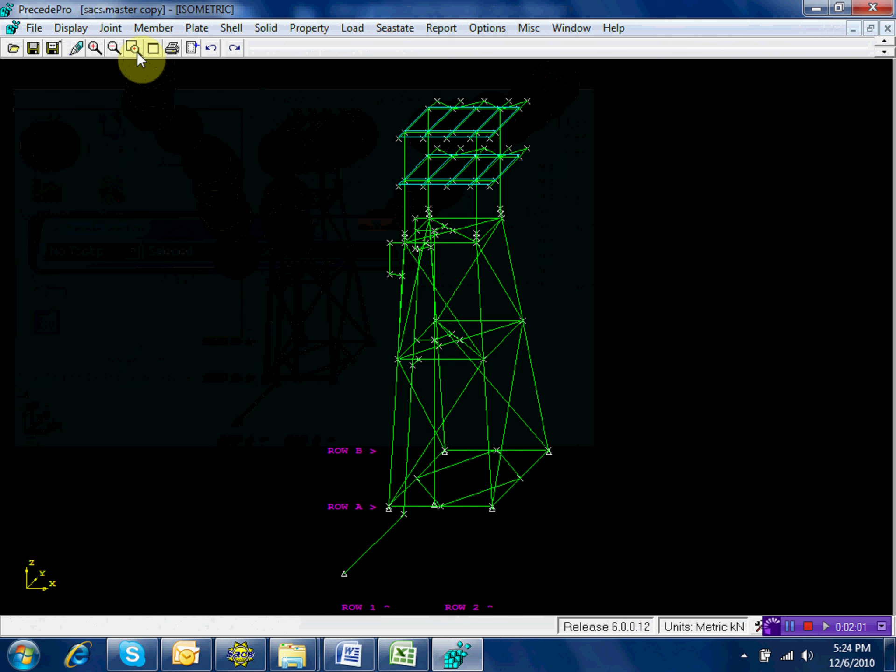So we will apply now corrosion allowance. Usually the corrosion allowance in here, top and then at a certain point. So in our basis of design, it states +2, -3. So if you will check this one, this is 2 and this is 3, so from here up to -3.

One of the methods, since the section changes, we will subtract 6 mm. The best thing to do, for me, because we will define the overrides later on, to be consistent we have to introduce a joint at a certain elevation, and then define this as a certain segment or member.

Like for example, for this, I will add a joint. So I will go to member, and then divide, and then ratio. I will divide the member. I will introduce now the location, the boundary point of corrosion allowance. I will select this member, this leg, and then press apply.

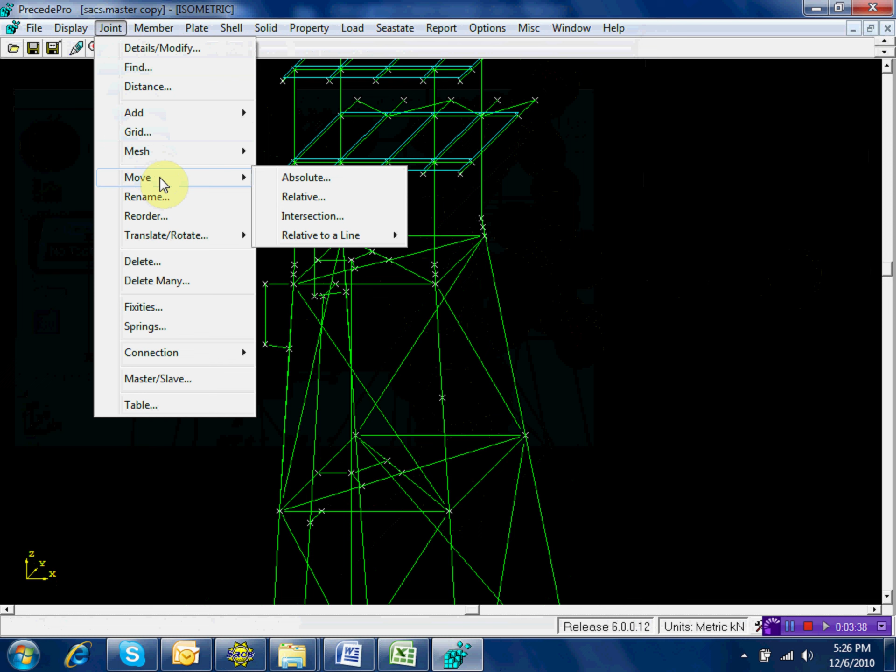So here is now the joint created. Okay, now I will go to joint and move this to elevation. Take note, elevation of the point is -3, right? The splash zone, the lower.

So I will go to move, and then relative to line, and then in terms of z coordinate. I will select Z coordinate. I will select this joint, along that line of course, and then I will consider -3. Press apply. So this is now the point on the splash zone, right?

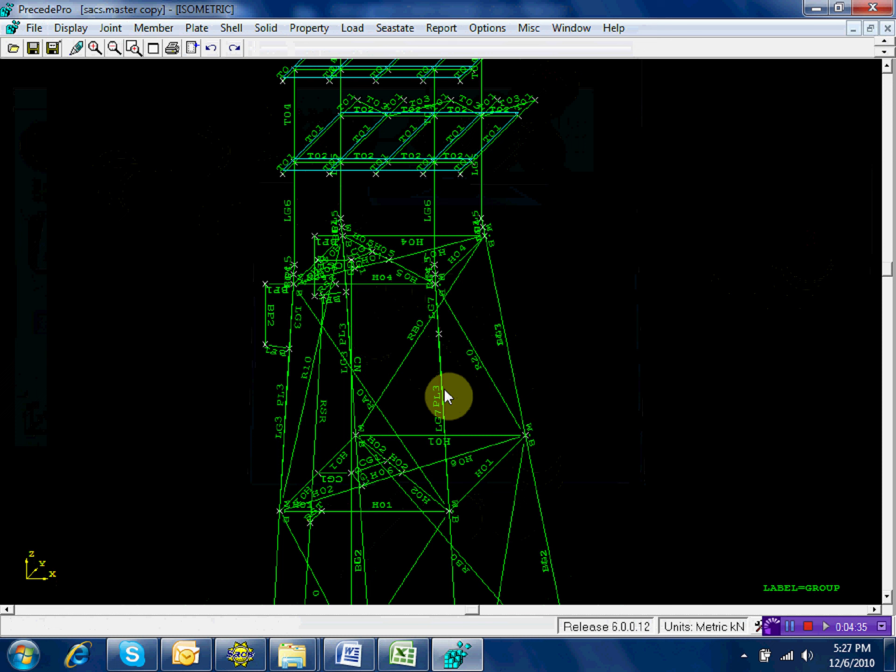-3 and then +3, transition pieces. But you notice, when you add a joint, it will become like this. If I will go to display, go to labeling, and then member group, it becomes leg and leg.

The very principle: you add a joint at elevation -3.0. I will go to display, and then select. I will deselect disconnected joints and plates, and then I will exclude pile, because I cannot clearly see the member. So pile, and then wishbone element, the w.b. Okay, so it will go like this.

Now you notice when you add a joint, the original group member is LG7, right? The original for this member is LG7, LG7. When you add a joint, this becomes LG7 and LG7. Right? So it's automatically assigned the same, but it's not correct. See, in our model, like this, you notice in here, this is the correct one, right?

1.5 meter, you have 105 by 3.5, and 103 by 2.5, and then 1.5. So it should be represented by this. Okay, so I will rename...

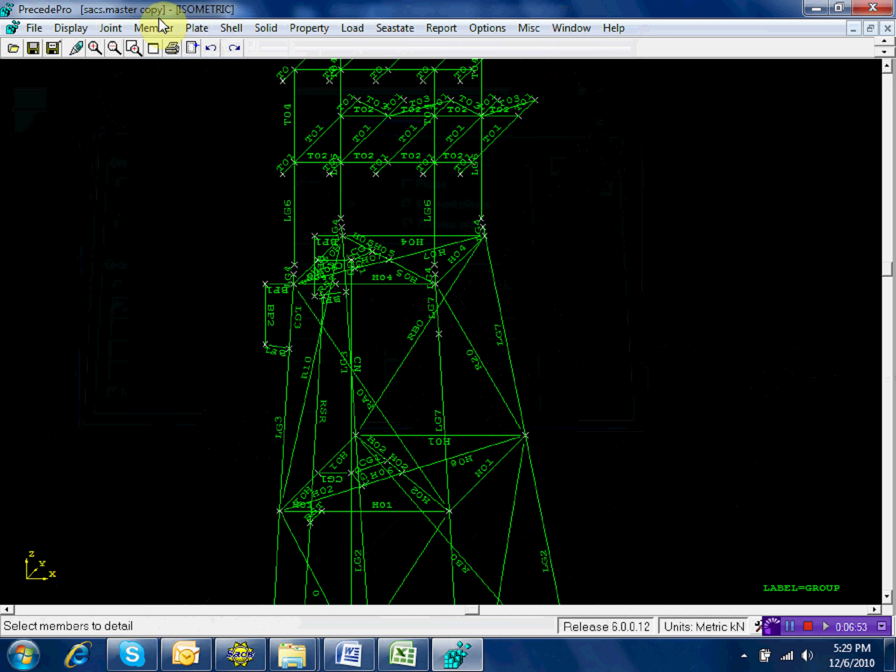Okay, so I will rename this, I will make another group. So member, go to member details modify, select this, and then I will call this LG, you can put A, LGA for this. LGA for this. Okay, LGA, press apply, and this I will change to this member on the upper half on the splash zone area as LGB. LGA, LGB. Press apply. And then I will define LGA.

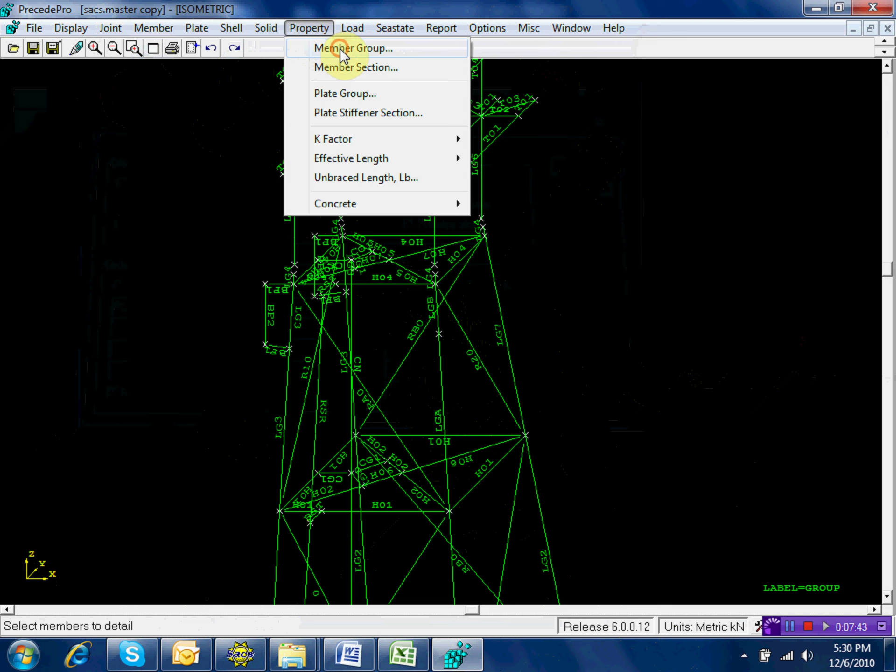Now take note, LGA to member segment. So go to property, member group. I will define now LGA, which is this. LGA defined. This is a tubular member. What is the diameter? 105.

We can copy, probably. No, but this is 3. It's okay, for a while.

105. I will discuss how to copy group level later on because this is symmetrical. Let me finish first. 3.5, okay, and the FY for this is 35, right? Segment length, you have to define 1 segment length if you have 2 segments, and the rest will be by program. So in this case, the length is how much?

1.5. Legs should be flooded. There are 2 segments, like 1.5 meter length, and then the rest will be calculated by the program. So I will add segment.

Diameter for this is 103, and wall thickness is 2.5 with FY of 34.5. Always check flooded member for the leg. Now do not put any length because you have already defined 1 length. Automatic, the program will determine.

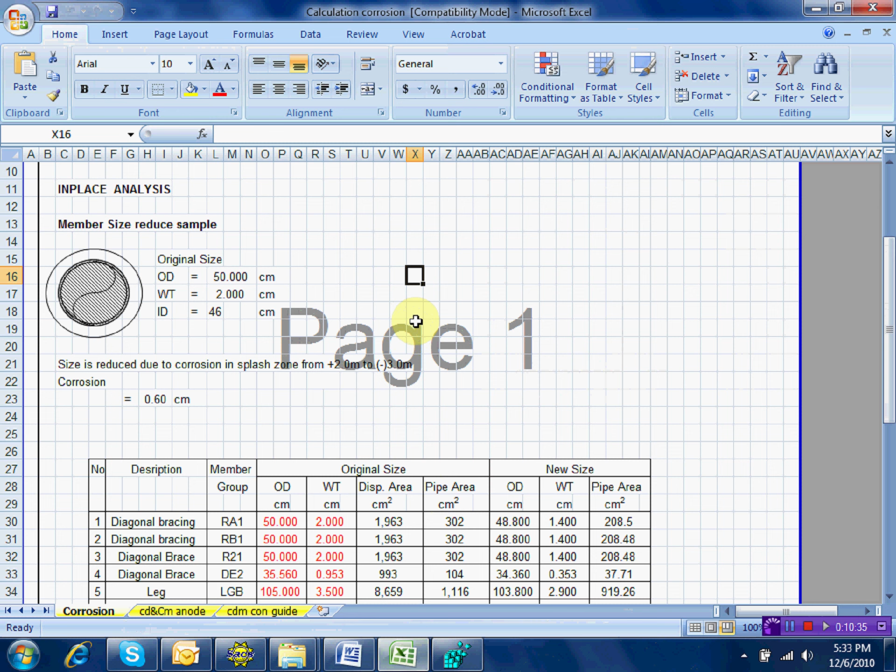Okay, that's why I sent to you the Excel file. You can go here. So you see, I have already this one, the leg, LGB, this file here. You have two segments having different diameter and wall thickness.

Now, the corrosion allowance as per design basis is 6 mm, right? So this is already calculated. All you have to do is input the wall thickness and diameter, and this is automatic already. We have already the formula. Now try to check the formula. I have already provided the formula.

Okay, so this will be your new size. Now, for example, see, LGB diameter is 105 by 3.5, right? See, 105 by 3.5. And the remaining one is 103 by 2.5.

So this is now the new pipe area, the new pipe diameter. We need this to input in our structural dimension. So this one is already less with 6 mm corrosion allowance. Because see, if this is your member and there is a corrosion allowance, you have to subtract.

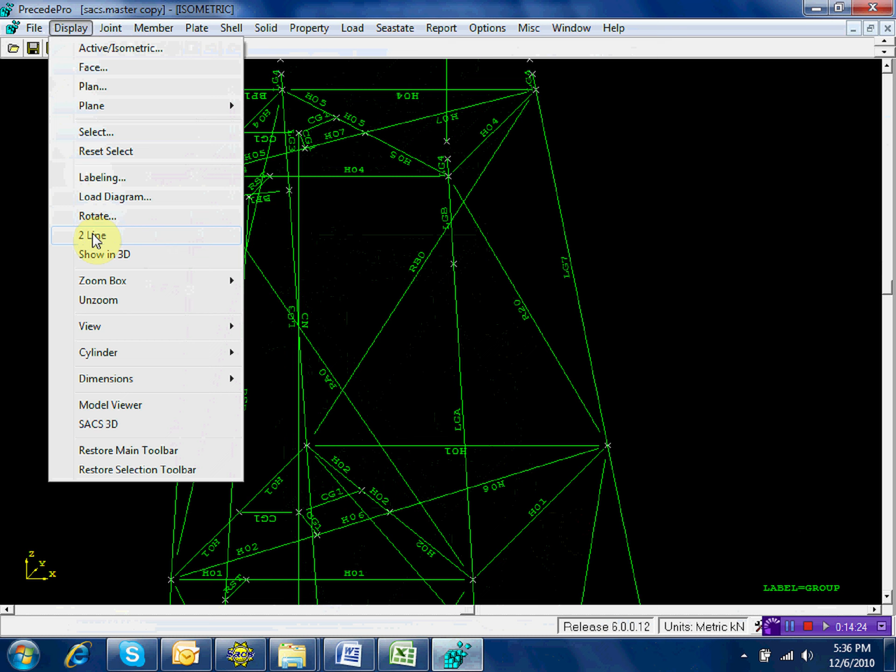You have to check flooded member, right? So LGB is already defined. But you have to check visually, because sometimes it will be reversed. Go to display, double check, and go to 2 line. Is this correct? Yes, see?

We have 1.5, and this one, the segment length here is subtracted with corrosion allowance. This is minus 3 up to 3.

Okay, the same procedure also on the other legs. This is minus 3. This is minus 3, huh? Okay, that's the splash zone. Minus 3 is the splash zone at elevation minus 3. Okay, on the side also, on this side, right?

On this side, now take note, this is similar, nah? So LGA for this, you have to double check. Okay, so 1.5 length, and then you have subtracted already the section up to here and up to here, up to 3 meters.

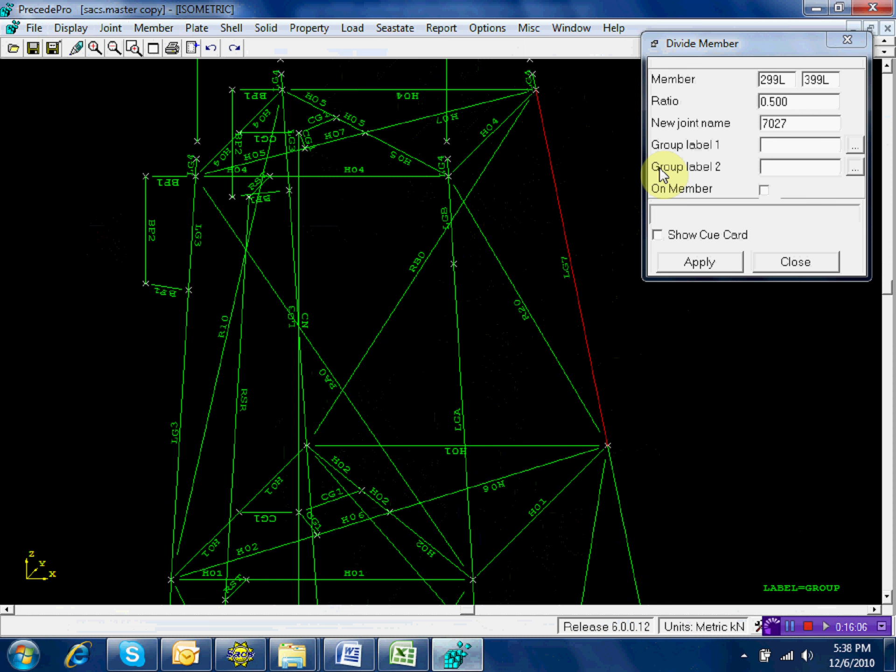Okay, on this leg member, divide, ratio, select this, nah? Apply, and then go to joint, move relative to a line in terms of z coordinates. Select this joint to be moved, this along a line, this line, and this line. The z coordinate should be minus 3.0, because the elevation at the splash zone lower limit is minus 3.

Apply, okay. Now you notice LG7 is a 3 segment. This is 3 segment length. See?

One segment length here and the other on this side. Huh, this is wrong. So what will I do? I will change the group. No, I will modify. This one is LGA, LGB. I will call this as LGC.

ABC, okay? Now, this member segment is actually equal to this. Yes, same, right? So instead of doing this, I will copy. This is the same, right? C and A are the same.

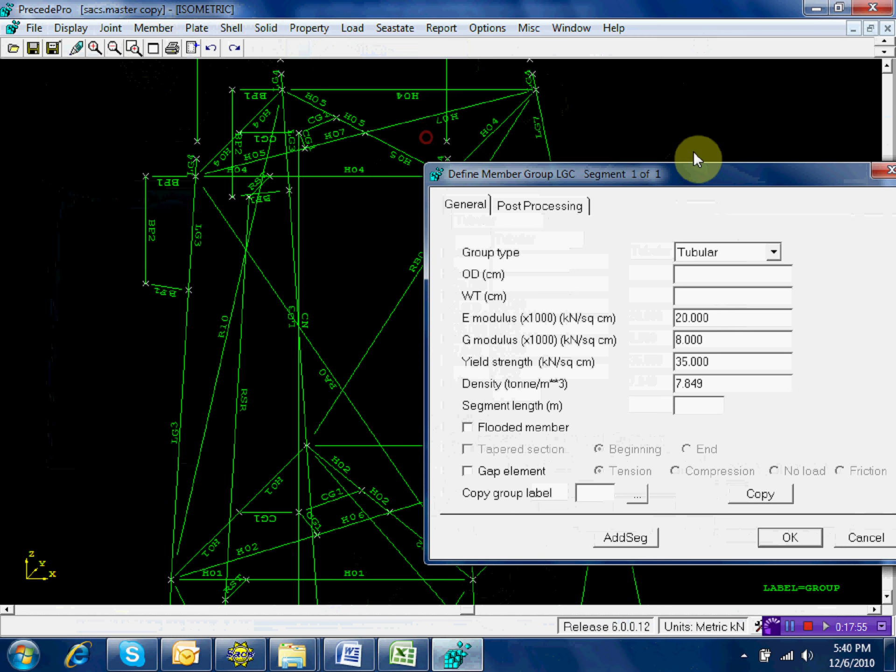So instead of doing that, I will go to property, member group. I will define LGC, okay? Define LGC, because this is LGC. Define, and you see in the group, copy group label. You can do that, nah? I will copy what member? LGA, right? LGA. So I will go here.

And then I will select LGA. See, I select LGA. When you press OK automatic, you have to press copy. Copy, see, it becomes like that. Automatic, it's copied. The length is 1.5 automatic. What is the characteristic in LGA is also copied in LGC. So instead of inputting manually, you can do it manually, but you can copy also.

This is the first segment, right? 1 of 2, so I need to skip segment. I will press this, press skip segment. And then 103, 2.5. So this is now the segment 2 of 2. This is correct, right? 103 by 2.5. This is for segment 2. Okay, so press OK now. Is this okay? Okay. Close and then save.

LGB, LGA, LGC. So I will modify this member. The member on the splash zone area, I will call this as LGD. This, the remaining, and you notice LGB and LGD are the same. Segment, diameter, length. Just copy. Okay, apply. So this becomes now LGD.

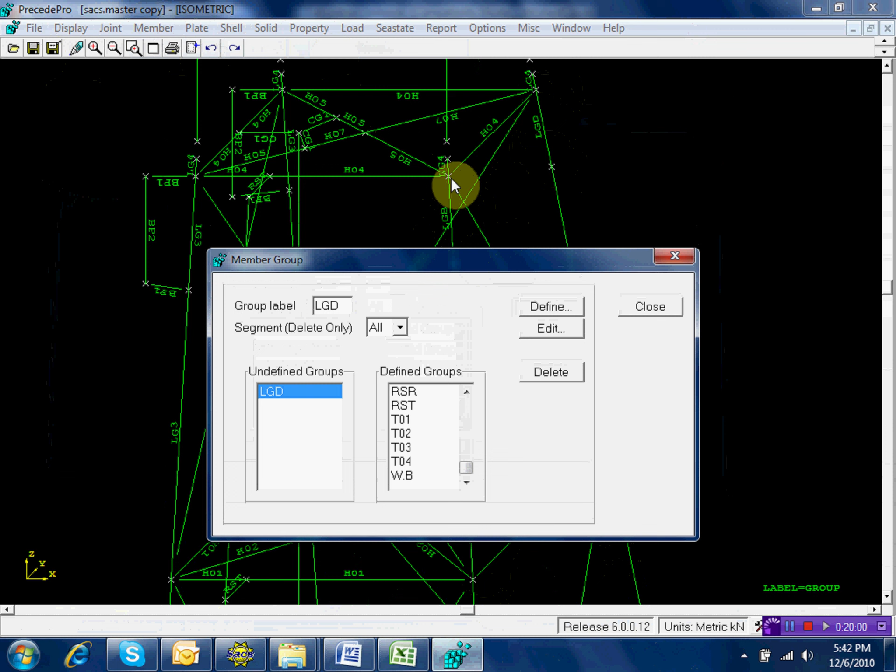So I will go to property. I will define now LGD. Member, select LGD. Name this as LGD and copy LGB. Copy this because they are the same. Okay, define LGD now. Define.

And then I will copy group. What label is this? LGB, just copy. LGB, press OK. And then you have to press this one. Press copy, so it's already copied. Skip segment length, okay, so already defined. Copy, just only press copy.

And then press OK. Now double check. Display 2 line. Is this correct? Yeah, see, this is 1.5. And this length is already corroded.

So, minus, smaller, smaller. So based on this calculation, we have the calculation. You subtract the diameter and thickness by corrosion allowance of 6mm. So it becomes like this. The new size is, you have 103 minus 6mm, on 3 on both sides. So we have the formula.

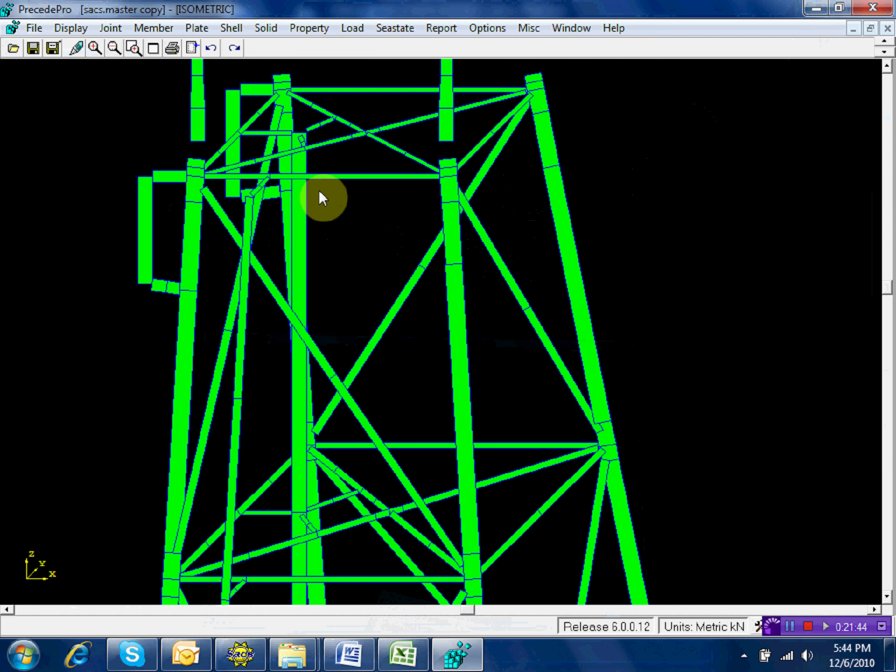Okay, at the same time, on these legs also, you have to consider corrosion allowance. Okay, so I will go to member. I will divide this member. Member, divide, ratio, and then select this member, this LG3.

Apply, okay? And then I move this to -3. Joint, move, relative to a line. Z coordinate. Select this, select this, this one, this one. And then -3.0, press apply. So this is now -3.

Now you notice this member, what is the diameter of this member? This is below, this is below. LG3, it's okay, but how about this? This member. So -3, actually this member is this. That's 1.5. This member below the splash zone, this 103 by 2.5, right? So that member is 103 by 2.5.

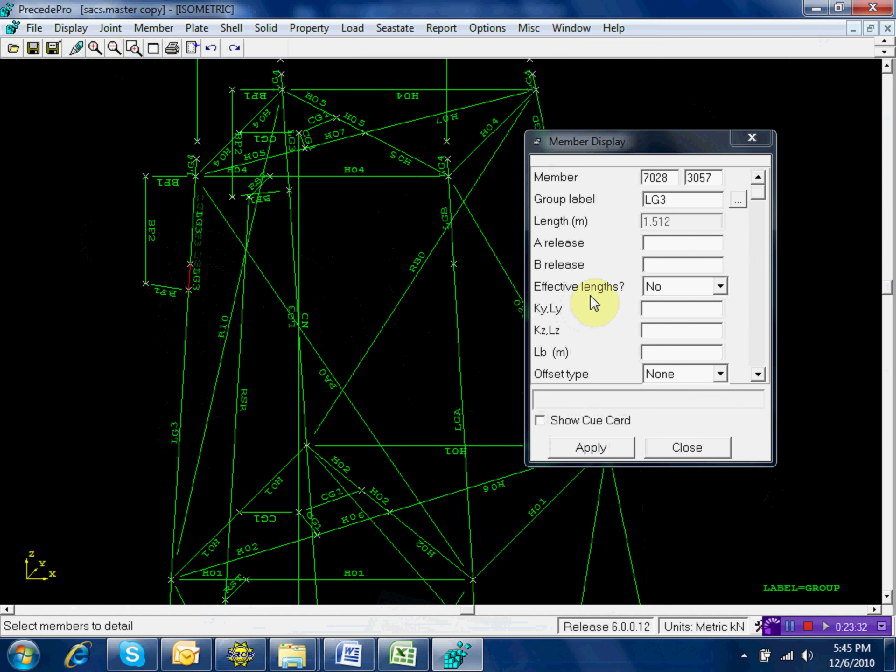So you are going to define. I will name this as... go to member, modify. You have to change this one, because LG3 is a 2 segment length. I will name this as LGE. You can name LGF as long as LG, it's automatic leg. LGE.

Press apply. I will define LGE. Property. Go to property. Member group. Define LGE. LGE is 103 by 2.5. The yield stress is 34.5. Check, always flooded member, for leg flooded member. Okay, so this okay now. Press OK. Close it. We have already defined.

Okay, this one, since this is no longer the same, this is no longer the same, I will rename this as... this member as LGF. LGF. LGF for this. Press apply.

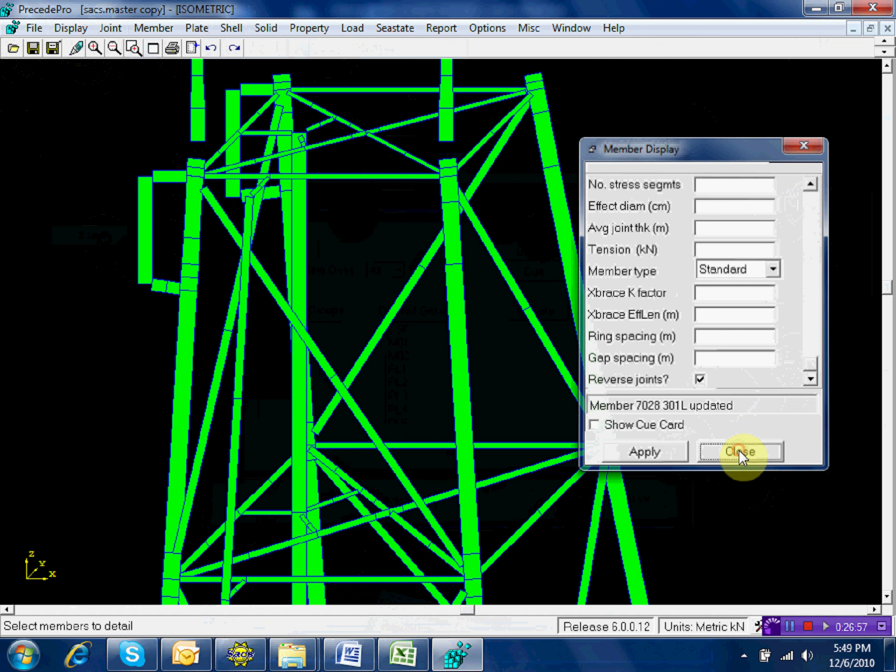Go to member, go to details. Select this member, and then reverse the joint. Reverse joints, press apply. Do not reverse if your model is correct. Then redraw screen. Press redraw screen. See, I have already here the can.

On the other side, on this also. LGF, LGE. LGE, LGF, copy, LGB or LGD.

This is very important to check the structural integrity. As per design basis, you should subtract. Other designers, instead of subtracting, they add 6 mm, so it's already incorporated in the section. In this case, we will subtract.

I will go to this leg, the other side. Go to member, same way, divide, and then ratio. I will select this leg, this leg, this leg. Apply.

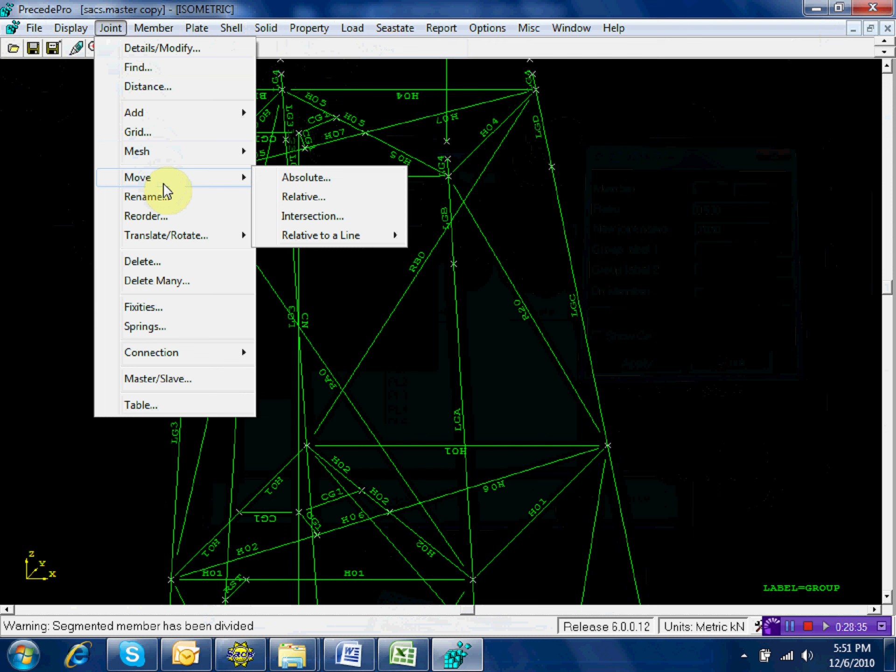Then I will move this leg, this joint, at 3 meters. At minus 3, I mean. Go to joint, move relative to a line in terms of z coordinates. Select this, select this, select this, and you want it to move at -3.0. Press apply.

I will change the group, but I will copy. So member, modify, select this, select the smaller one. I will change this to LGH. You can do LGI, LGI. So, I. LGI, LGI. Apply. And the top, this done as LG.

What do you think, do you have already defined H? LGH. LGH. Apply. They are the same, this one and this one are the same.

So I will go to property, I will define LGI first. LGI and LGE are the same, right? This one, so I will just copy LGE. Copy LGE. Press OK. So I have LGE now, and then you press copy, so this signals the program to copy that member or group.

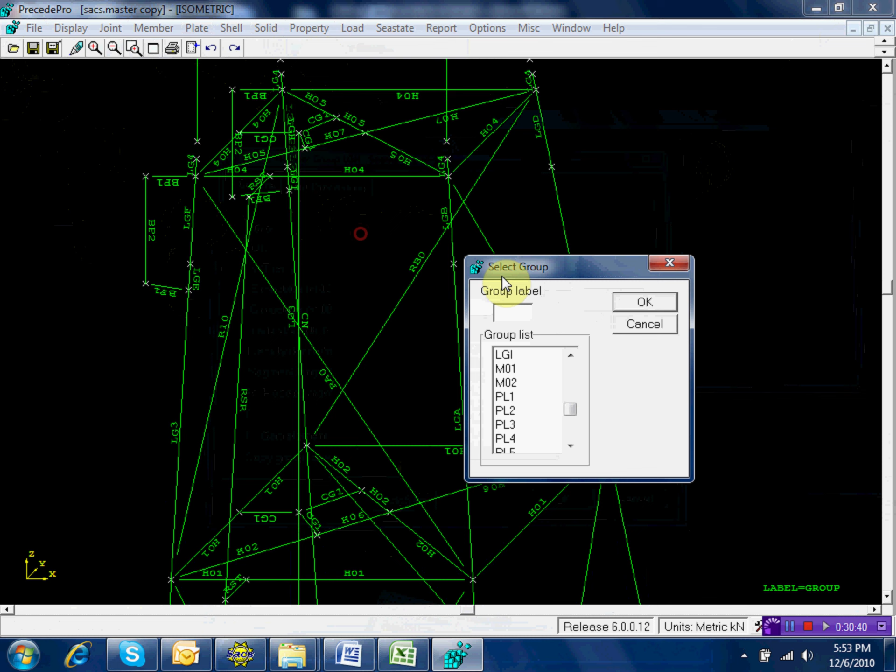Press OK, the same way on LGH, this member here. LGH, define. You have to copy what? LGF or LGB or LGD, LGF. I will copy LGF. LGF. Okay, and then press copy. So it will be like this.

Take note, LGF is two segments. Just press skip. Okay, so I have already now defined this one. Same procedure, flooded, the length is 1.5 automatic. So this is the fastest way, right? Copy a segment. If you want to, you have to go to property, member group, define, and then copy.

LG4 is also corroded, right? Because as per design basis, it's plus 1, minus 3, and plus 3. I changed this to plus 3 in order to, for this one, transition pieces, because usually transition pieces are corroded. It's corroded. Okay, so this one up to here, up to 3.

So if you go to joint, see this is at 3, minus 3. So this one, right? So LG4 also will be corroded. LG4 is actually 105 by 3.5. Take note of this. LGD, LGB, LGF, and LGH are corroded already. You subtract the diameter and thickness. So define also LG4.

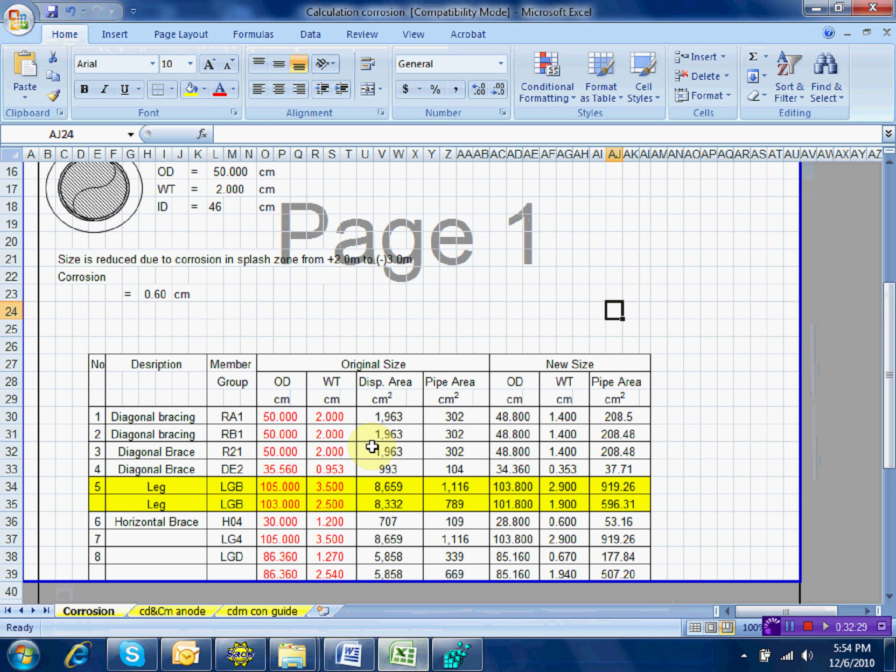LG4, okay, so this is LG4 now, this one. LG4 is 105 by 3.5. You subtract this with a corrosion allowance of 6 mm. It becomes 103.8 by 2.9. Go to property, member group, and select LG4. Press edit, you have to edit because it's already defined.

You just have to change. So you put 103 by 2.9. 103.8 by 2.9. 103.8 by 2.9. 103.8, LG4, LG4, 103.8 by 2.9. Press OK.

What else? We have already applied corrosion allowance on the leg. You need also to apply it to jacket legs, piles above jacket, transition, deck legs, diagonal braces, and nodes pertaining to the vertical face of the jacket seats. Take it in here.

Diagonal braces. Okay, before you add a joint on this diagonal, turn off the offset first, because this is already offsetted, right? This member, see, this is being offsetted already, automatically. So turn this off before you add a joint, otherwise you have two offsets. You get a problem with that.

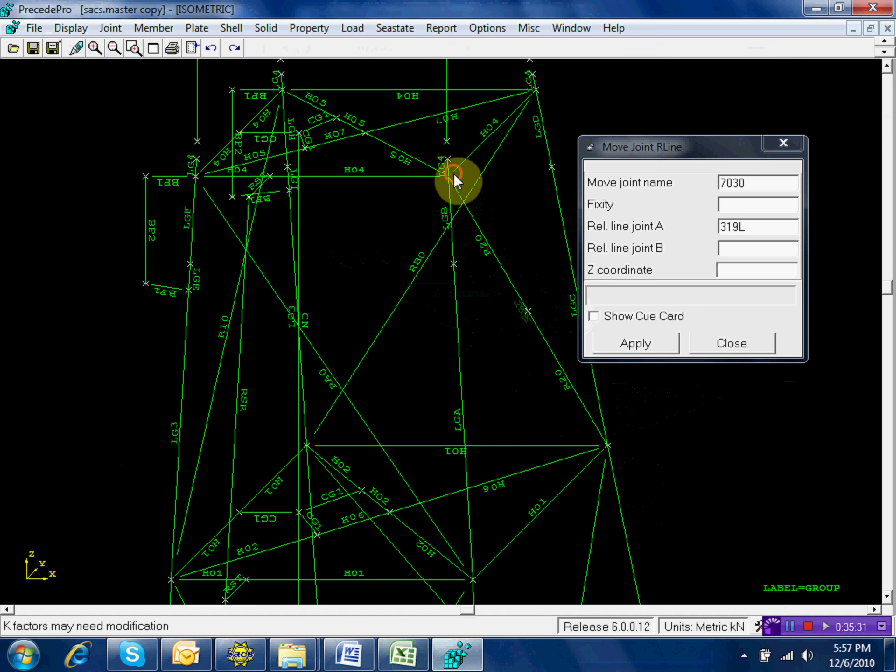But take note, the splash zone is located at minus 3. So joint, go to joint, you move this joint, move relative to a line in terms of z coordinate. Select this, move along the line, this one and this one. Your coordinate now is minus 3.0.

Okay? So this is the proper way to model corrosion allowance. So it should be on -3, the corroded part. Save the model first. Okay. This one, below the splash zone, has no corrosion allowance. So this is okay, right? R20 is okay. But this one, the remaining one, is not okay.

This is corroded. So I will change the member group. Member, details. This one, I will select this one. And then I will make this as R21. This one is R20, this one is R21. Okay? R21, press apply.

R20 is actually, what is the diameter of this? Display, labeling, I want to see the section. This is 50 by 2, R20 is 50 by 2. So this one should be R20 minus the corrosion allowance. R21, the original section is 50 by 2. So go to display again. Labeling, member, and then group. I will define R21. Okay?

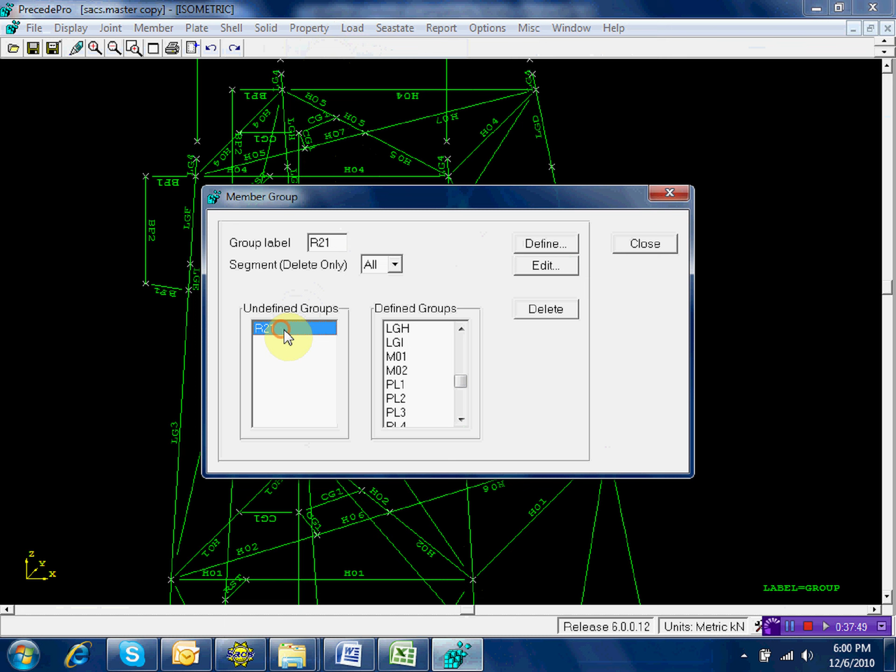R21, so go to property, member group, define R21. This is 48.8 by 1.4. So this is 34.5, 7 point. Legs only are flooded, so do not check flooded member.

Okay. So, double check. Display. It will be like this, it's already subtracted, so this one is the larger one and this one becomes the smaller one. Save. On the other side, same way. But first, turn off the offset. Because if you don't turn off the offset, this side will be offset and the other side will be offsetted.

Now, go to member and then offsets. This one. Press none. Apply. And then revise. So I will go to member. I will divide the member. And then put ratio. This one. So this is a very painstaking procedure. You have to correctly model this one.

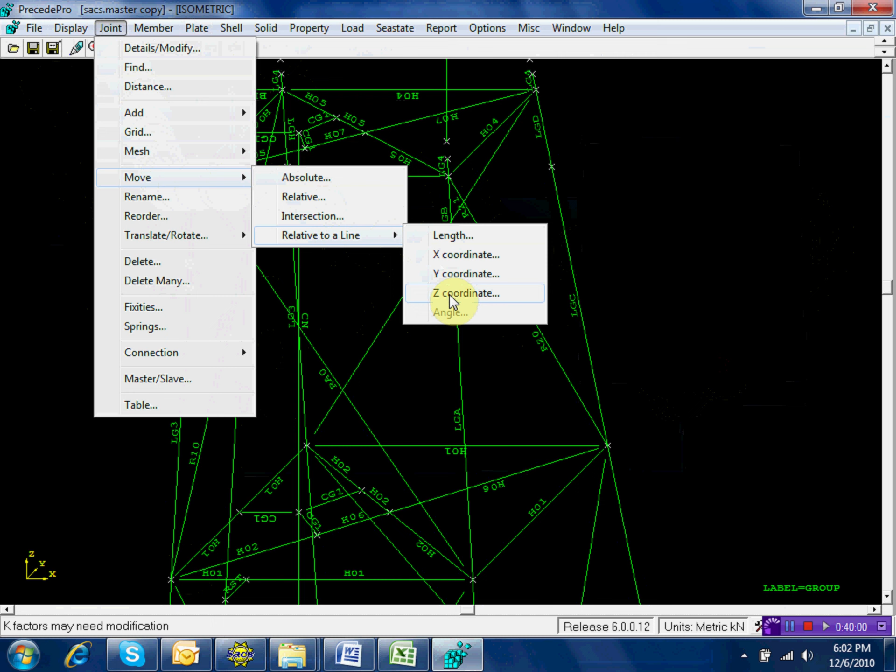Joint, move relative to a line in terms of z coordinates. Select this. Select this. Select this and then minus 3.0. Apply. R10 is okay. Now take note, these are the same, no? Diagonals are the same, so you can copy R21, but you have to change it.

Member, details, change this one to this member here. This is R10. So I will make this R11. This is R20, I make this R21. This is R10, I make this R11. Okay? Apply. And then define. But take note, diameter and wall thickness of R21 is equal to R11. So go to property, member group.

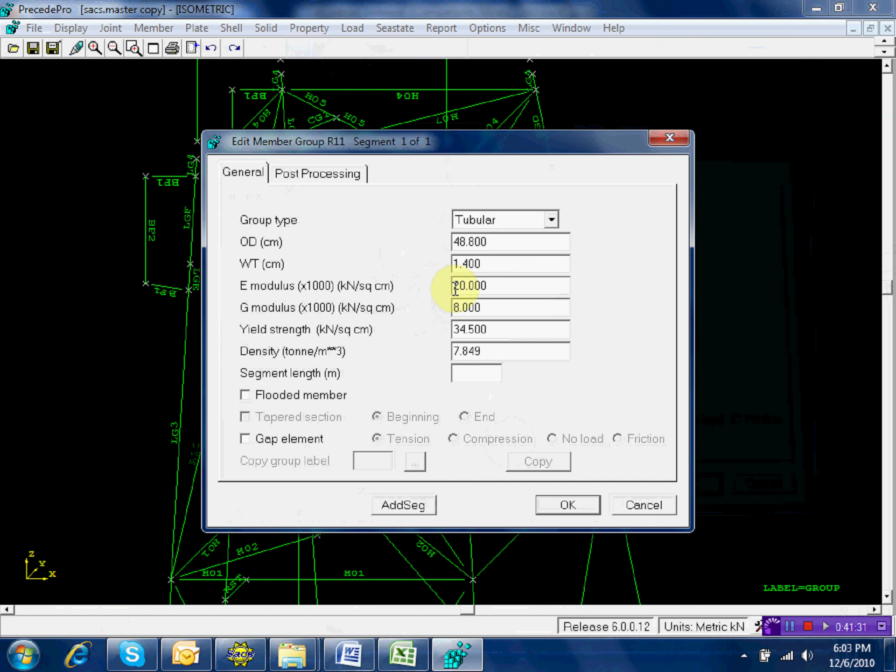R11. Press define. And just simply copy R21, because they are the same. So group, copy group label. R21. Press OK. And then copy. So this is now the corroded, no? It's corroded already. Press OK. So you define only one and then on the other side, on this diagonal.

Don't divide first. You have to turn off the offset. This diagonal now. This diagonal. Offset will be none. Apply. Okay? And then I will divide. Member. Divide. Ratio. Select this. Are you following? Press apply.

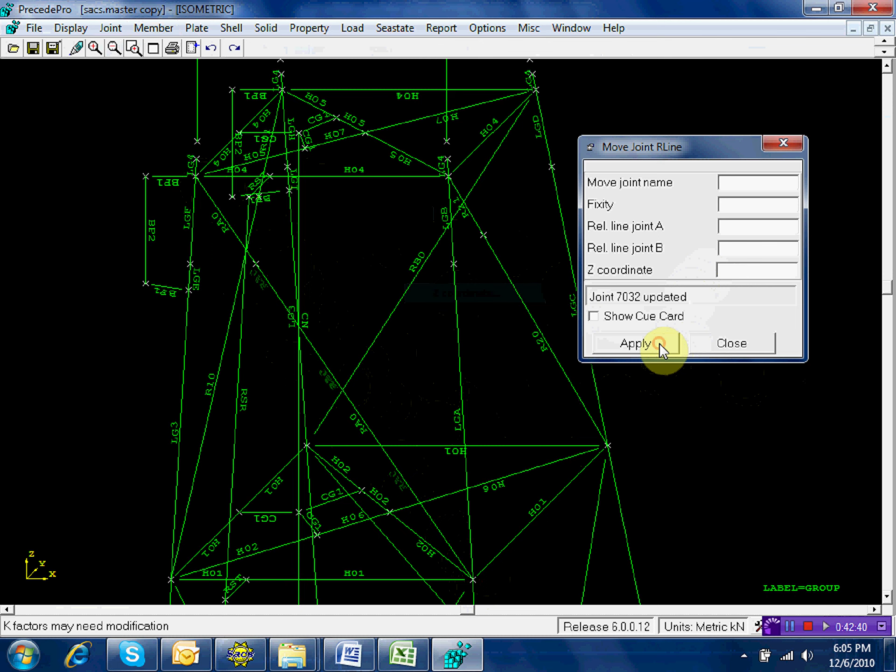And then move this joint at -3. Joint, move relative to a line in terms of z coordinate. This one, this one, this one. So minus 3.0. Press apply. Okay, RA0.

I will change this one to this member. This member only has a corrosion. This one is okay. So I will change this to RA1. Thank you. RA1. So press apply and then copy. It's either R21 or R11 because they are the same, no?

Property, member group, I will define RA1, define, and then I will copy R21. R21 is the same, no? R21, but you have to press copy in order for the program to copy. Now, this is already copied. Press OK.

Close it. So, you have already done this one. The other side, you have already done this one, right? Okay, it's already done. So, we have only this side. So, remember, turn off the offset. None. Press apply and then divide that member.

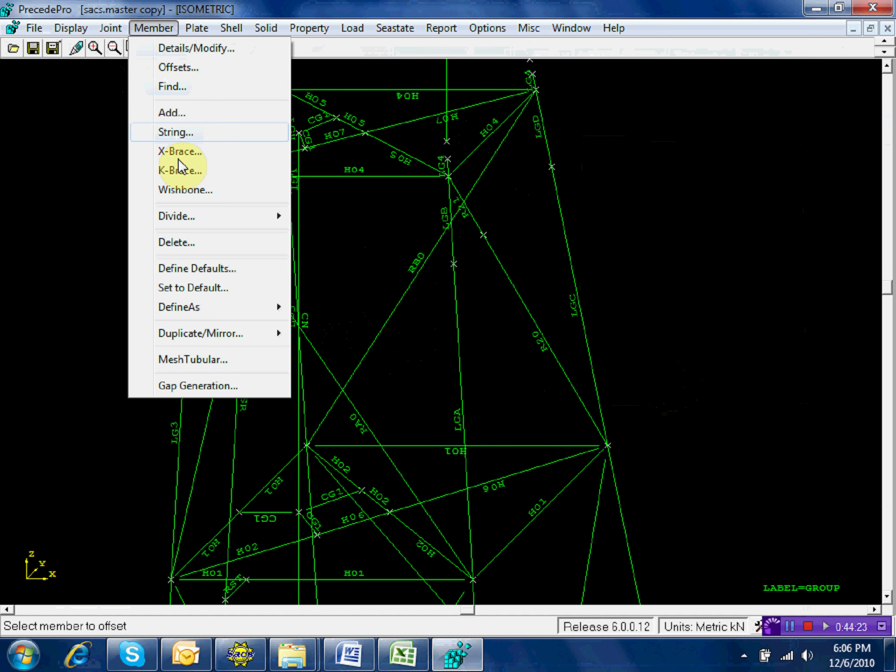Apply, and then move this member at elevation -3. Joint. Move relative to a line in terms of z coordinates. This one, and this one. -3.0. Press apply.

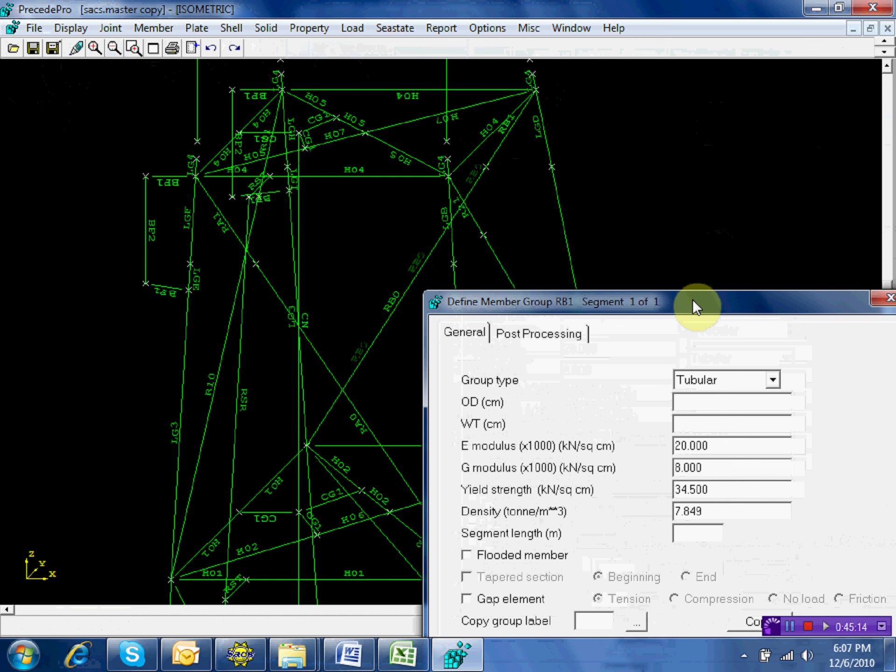RB0 is okay. So we will define the upper section. Member, details. I will change this one to RB1. Apply. And then change this to RB1, define RB1 property, member group, RB1, press define, but take note, RB1 and this one, RA1, are the same. So copy RA1, this one, press OK, and then press copy. It's already copied. Press OK, close.

Okay. When I don't offset the member with none, I think the result will not be different. Not different, are you sure? It's not different. No, do not do like that, okay? One member I copy. Okay.

The member I will offset. Now, if you offset this one, see, you have already offset, and then when you divide it, automatically there will be an offset on that side. Because when I do the drawing then... No, there will be. For example, this one. Say this is with offset, right? This one will be with offset. If I divide this member into ratio, okay.

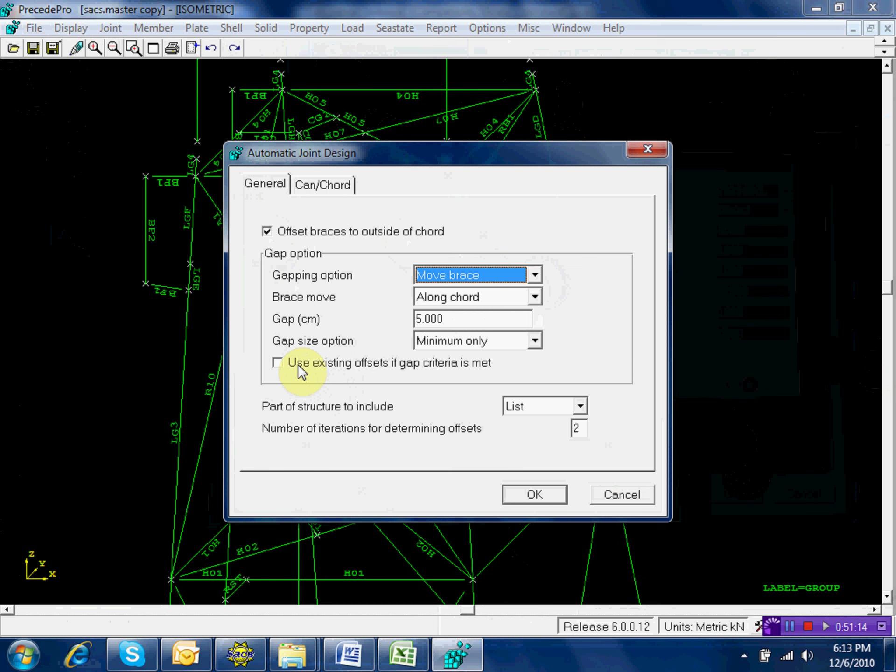So I will go back to offsetting. Go to joint, connection, automatic design, offset brace outside. We will go back because we turned it off. Just go back, no problem. And then go to move brace, and then check use existing offset if gap criteria is met. Okay, so you go back already to the offsetting.

Go to joint, go to connection, press automatic design, because we turned off the offset, right? So we'll go back together. Automatic design. Check offset brace to outside chord, and then move brace, and then check use existing offset if gap criteria is met. Press OK. So it's already offsetted, sir. No problem. You just go back. Okay.

My question now, when will this corrosion take place? Is it during or after the installation? No, I don't think so. This is more conservative. We assume that at the splash zone area, all has been corroded. So maybe it takes time, 5 years up to 20 years or the lifetime of the structure. Let us say 20 years.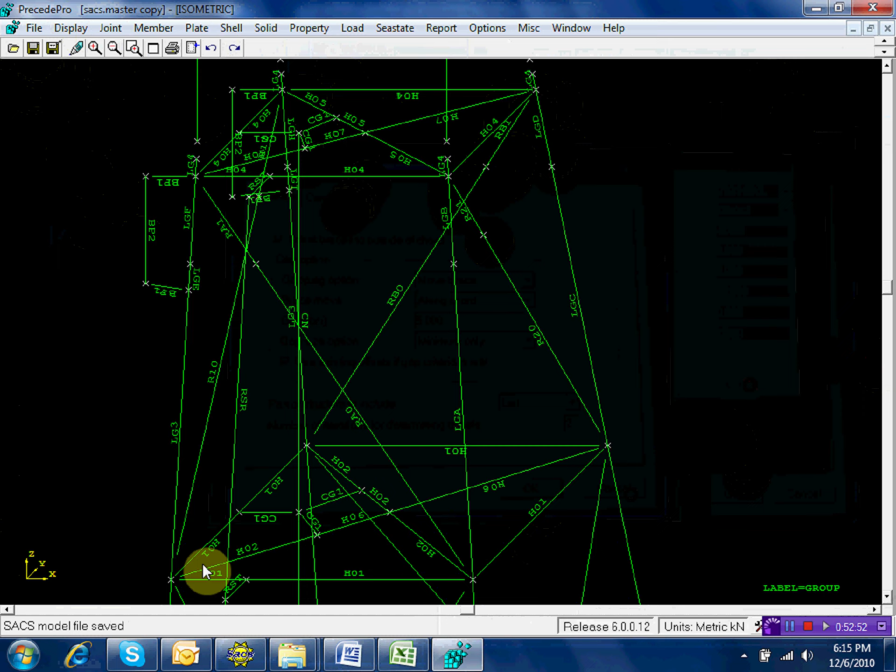But in the real sense, there is wave loading on the original size. So to capture this original size, we need this parameter. That's why it's in here. We use this new size to calculate for structural integrity purposes. How about wave loading?

So you notice that wave loading is a function of diameter. When you reduce the diameter, your wave loading will reduce also, right? So all you have to do is use what we call overrides. These group overrides will be used by SACS to calculate loadings. It will not affect stiffness or structural.

So for loading purposes, for example, displaced area will be used in calculating buoyancy. See? We have the displaced area in calculating buoyancy, pipe area in the original in calculating weight. Okay? So how to use this one? Okay. We change the diameter R21, LGB, LGD, and thickness.

H04 also is included. By the way, because it's not complete yet, we will go to peripheral members and nodes pertaining to the upper horizontal level. It's only on the periphery. So what is the upper horizontal level? This one. H04, H04, H04, H04. So based on our design basis, what is H04?

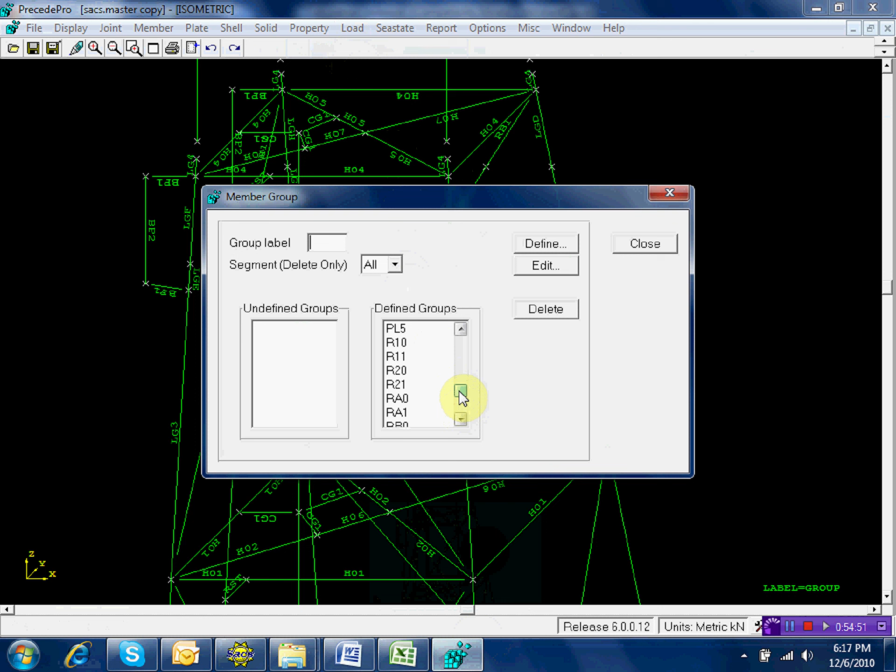We have here. So it becomes smaller. That's a problem. So for H04, it becomes 28.8 and 0.6. So we'll apply H04, right? Go to property, member group. We will update H04. H04, edit. The wall thickness should be 28.8 and 0.6.

Okay. Do not consider the inside. Yeah, we have inside, right? Do not consider inside because as per design basis, it's only on the peripheral members and nodes. So it's already complete, right? But in wave generation, you have to consider the actual dimension. So how to do that?

You go to Seastate. Go to global parameters. See? In the global parameters, we have what we call group overrides. Member overrides, and we have member group overrides. So we will use the member group overrides, because these are groups. That's why I introduced joints to make the analysis simpler. Now, group overrides. I will use member group overrides.

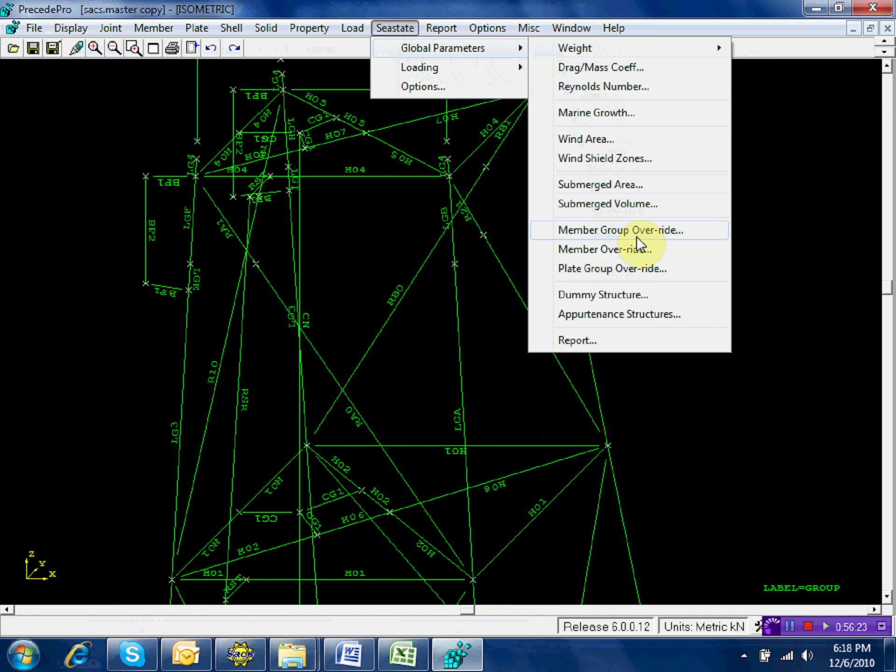Define. So, what are these members? Those members we defined earlier on the splash zone, because we altered the diameter, right? When you change the diameter, your wave loading will change also. Actually, it's only for integrity purposes. So, first is LGB. I will define LGB. The group LGB. Add. So, I have now LGB. Press OK.

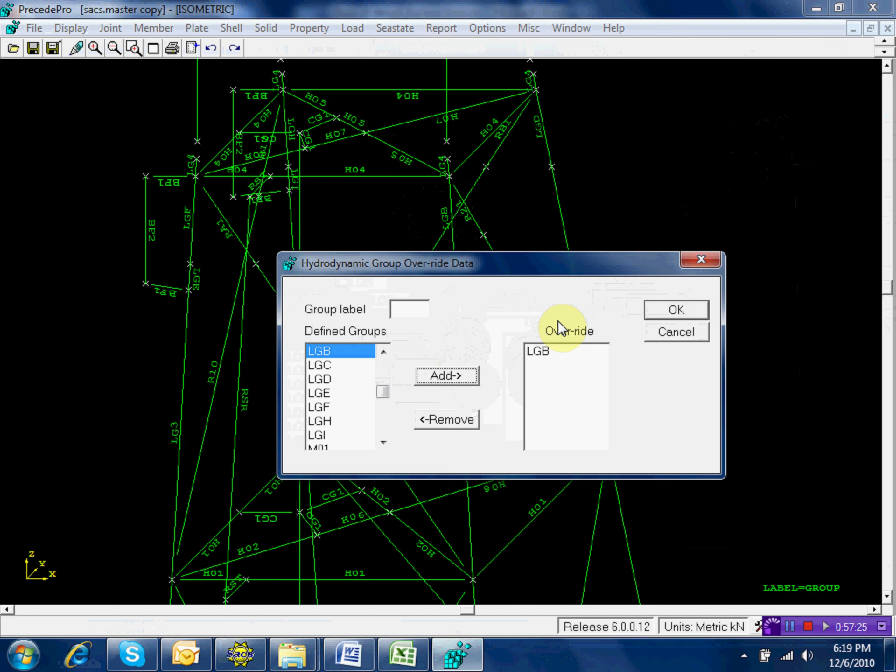Do you follow? I'll go back. So, you select LGB, leg B, and then press add. So, this is already selected and press OK. Just make it like that. No change, no override. Apply marine growth, of course. Apply override to all group segments. But you have to change the cross-section area.

This cross-section area here is for weight calculation, because you subtracted the wall thickness and diameter. So to calculate the weight, you put the cross-section area here. The cross-section area will be the actual area for weight calculation purposes. The actual area of LGB is this, right? 103.8, 2.9, and 101.8, 1.9.

Take note. In defining group overrides, if you have two segments, you have also two group overrides, as per SACS. There is a manual. LGB is 103.8. What is the original size? Pipe area is 1116 cm squared and 789. So, take note of this. 1116, 789. Because you have two segments for LGB.

So, the first segment I am going to consider is 101.8 and 1.9. So, cross-sectional area is this, right? Pipe area. Use the original. 1116, or 789. LGB, 789. Again, cross-sectional area in group override is used to calculate weight. The displacement area is used to calculate buoyancy.

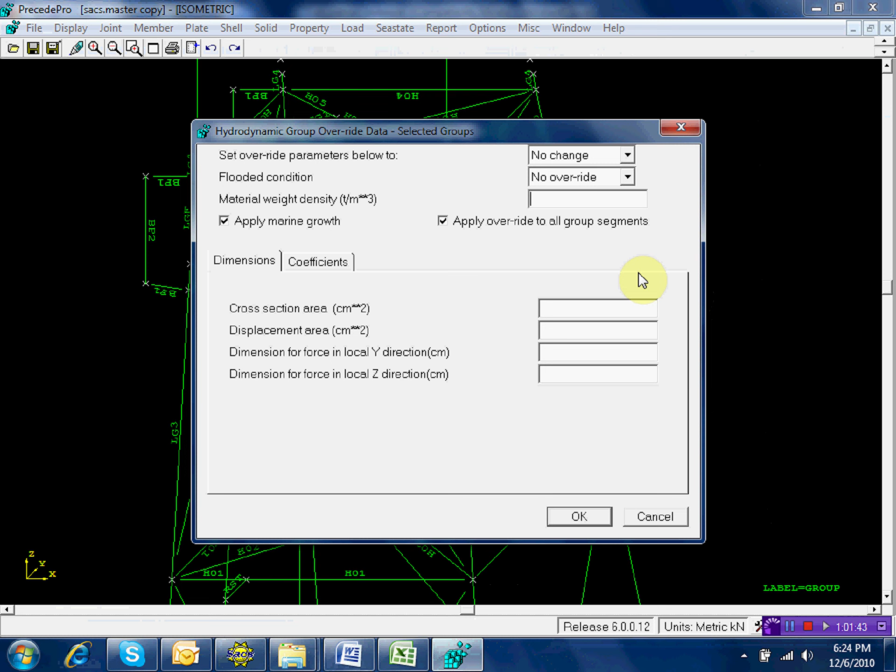And then define the cross-sectional area at the original. So the cross-sectional area at the original is 1116. The other one? 8659. And then what is the dimension? Original, 105. 105 by 105.

Yes, yes, automatic. Yeah, because we have 105 and 105. It's automatic. Even if it's interchanged, still the buoyancy is the same. It's upward. The weight is still downward. It's automatic. Yeah, it's automatic. It's not dependent on which section. No, it's not. It's not.

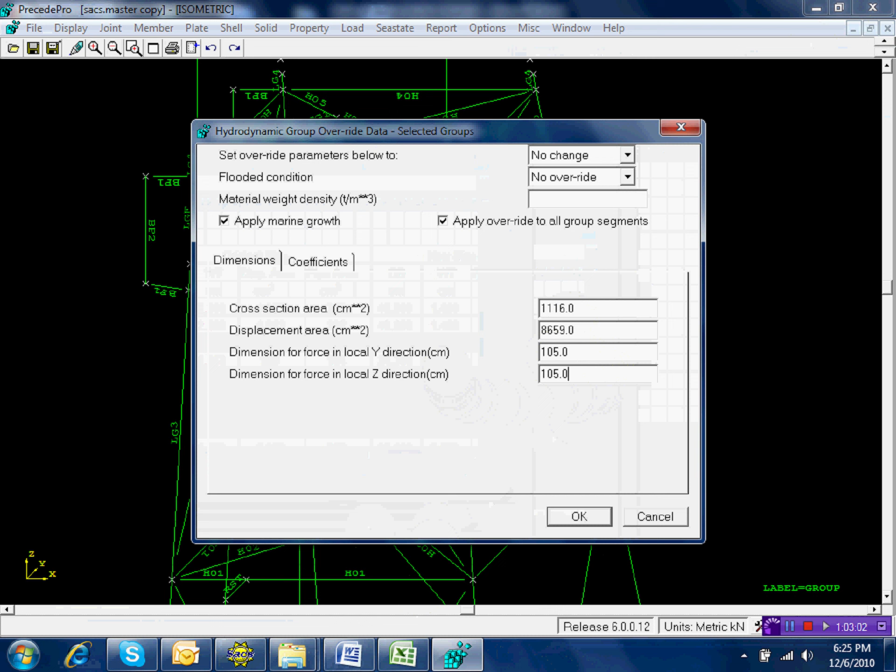Now you have LGB, LGD, LGH, LGF, the same, right? So you just copy. But you cannot copy in here. You copy it in the data generator. That's why it takes time. Very easy to make mistakes. Yeah, modeling alone takes time.

Yeah. That's why in some companies, like for example Saudi Aramco, they have already set up. If this is the water depth from 50 to 80, they have already the model. This is the water depth, this is the configuration. During detail engineering, modify. If this is the water depth from 20 to, let us say, 30 meters, use this configuration.

So for example, PTEC, if we have already some project like this, 20 to 30, we have this configuration. We can do FEED, we can do detail engineering. We have already the drawings, AutoCAD drawings, we just update.

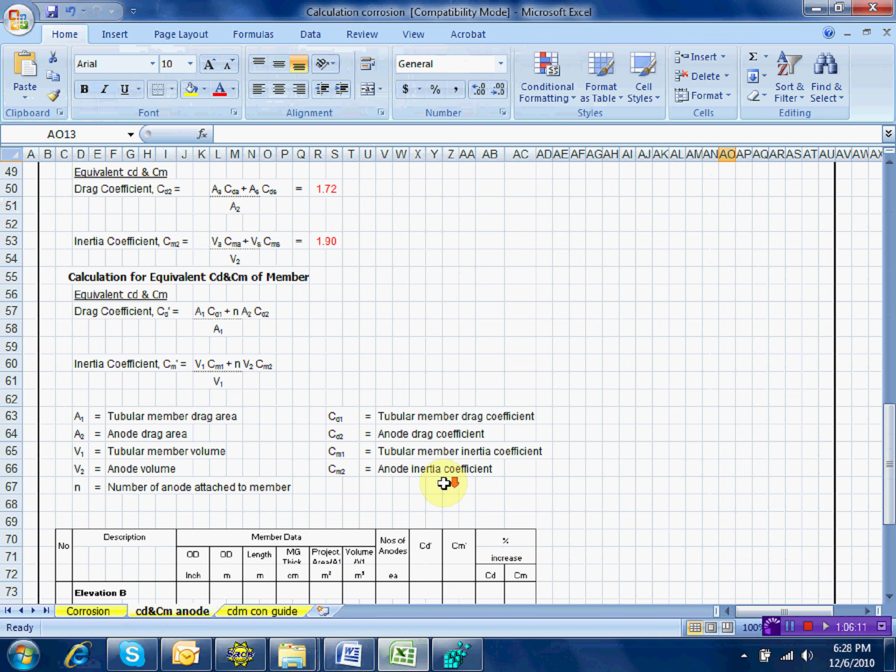You will increase the CDCM. See, I have already the calculation of CDCM with anode. Assuming this is the anode, when a wave passes through this member, take note, the anode is big, 2 meters on the section, so there are wave loadings. Now, for example, we don't know the number of anodes, so we cannot use this one because it needs the number of anodes in this calculation. So during FEED, the assumption is just increase.

Because some clients prefer it like this. Anodes are dependent on the exposed surface area of the jacket. We don't have that information because this is FEED and we want to run in-place analysis just to check. Some engineers don't use the overrides. They just increase the CDCM. See, you notice the CDCM here? Where's the CDCM?

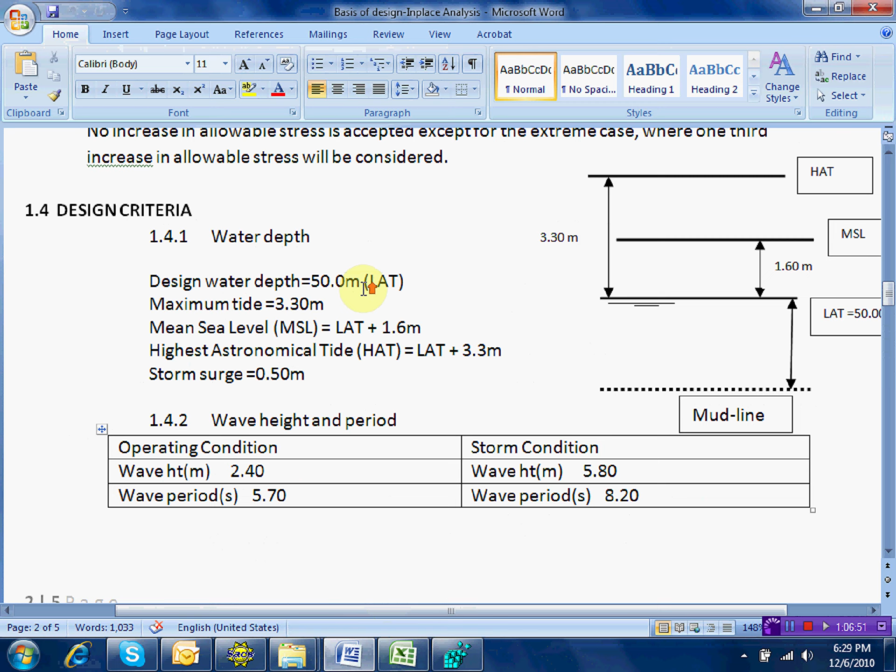Yeah, this one. In order to capture wave loads due to anodes, some will go to increasing the coefficient by 7%, 5%. So for example, 0.65 smooth, multiply this by 1.07. That's your new drag coefficient. So that's another way.

Another way of representing appurtenances which are not modeled on the jacket, like anodes, clamps, pad eyes. Those are not in the model, right? We apply them as loads only, but during wave loading, it's not captured. So what we have to do is increase this by 7% or 5%. So 0.65 times 1.07, 1.6 times 1.07, 1.05 times 1.07, 1.2 times 1.07.

So that's another way. It depends on the client, because some clients want CDCM calculated like this. So try to imagine, when there is an anode, see the increase in drag. It becomes 12.78% increase, others 20%. So it's much better to represent it like this rather than a 7% increase.

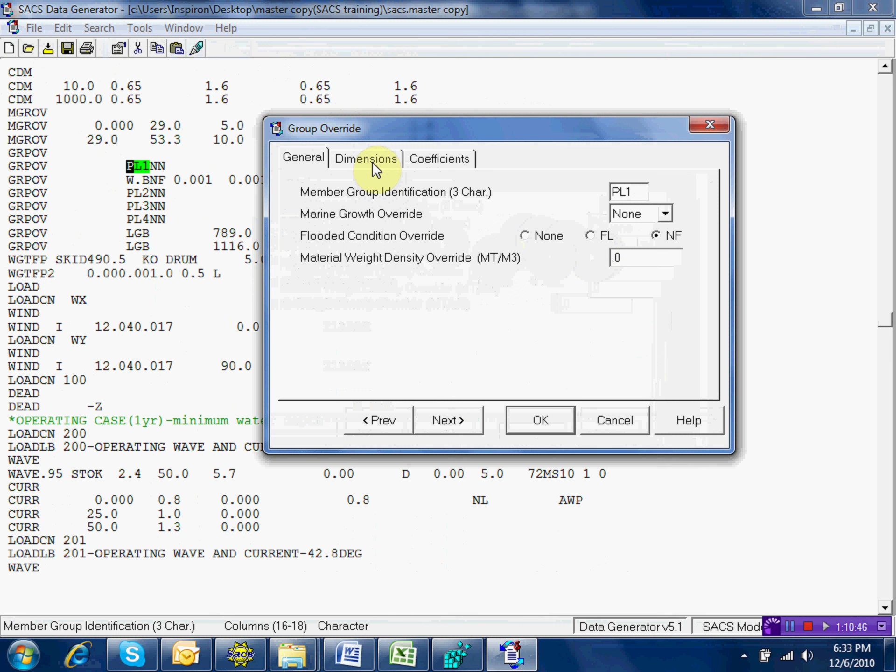Copy this. So you notice I will discuss group override. This is very important. This is actually automatically generated by the program. If you double click this one, this group for the pile is this. If you go to dimension, the displacement area override is 0.001 y, and y is local y dimension, 0.001, automatically calculated by the program.

Because this pile is inside the leg, it will not capture wave loadings. It's only the leg, right? See the pile, PL? CDM.

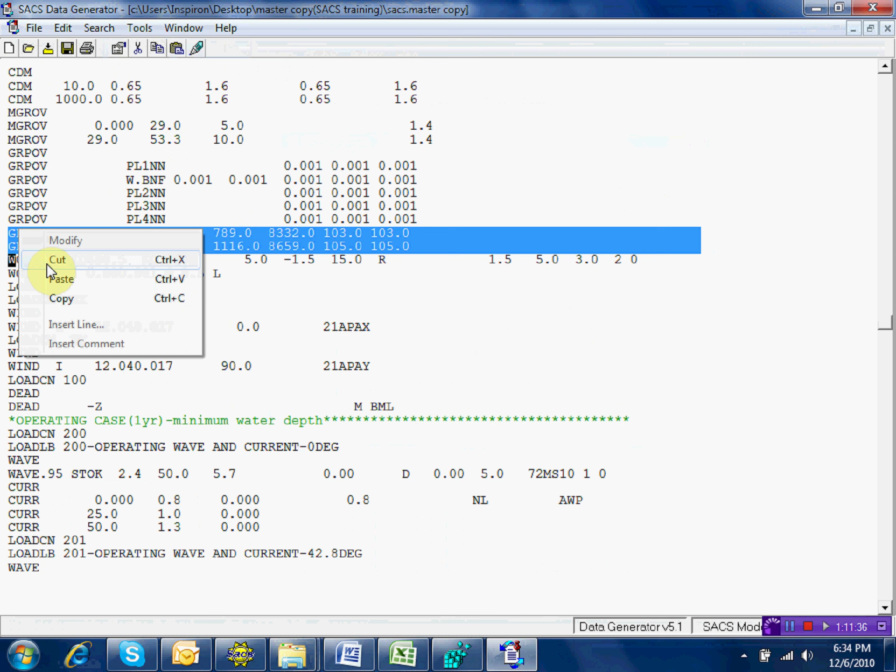Okay, I have now LGB. Press Control and copy, and then paste. What is that member again? LGB. Next is LGD, right? LGD, I will change this to LGD. What else?

LGH and LGF, right? LGH and LGF. So I'll just copy LGH and LGF. Is that correct? 2 segments, 2 overrides. 3 segments, 3 overrides.

What else? We still have R21, RB1, but take note they are the same, right? So we only model one and then copy. I will model R21, copy this, put the cursor here and paste. I will change this to R21.

Dimensions, of course, you have to change. Displaced area you have to change. Local Y you have to change. We will go to our calculation. R21 is, corrosion, R21 is 302 and 1963, in centimeter.

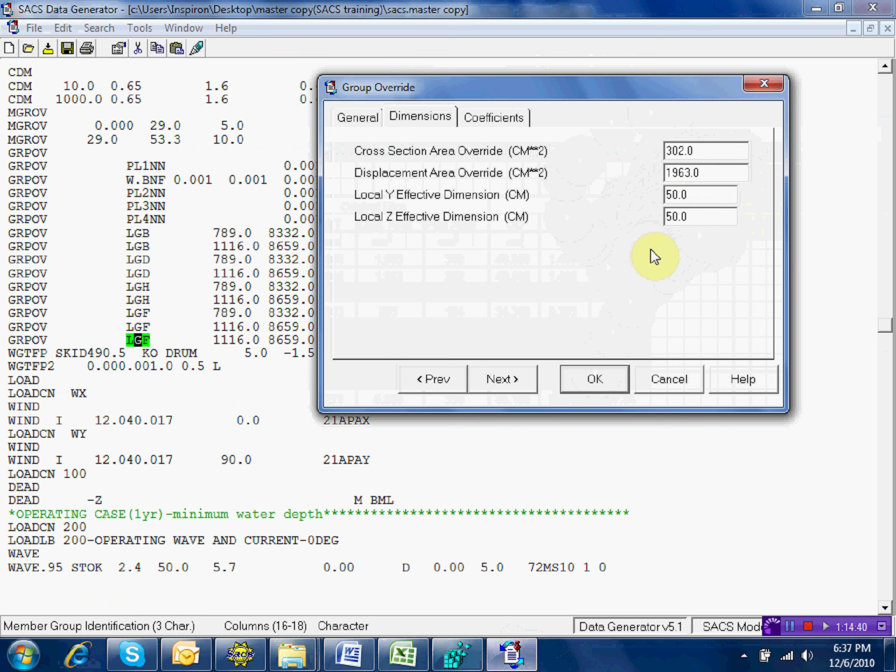Okay, press OK, and then copy for R21. What group? R11, RB1, RA1. Copy this, right click, paste. R11, right? Same. RA1, is that correct? R21, R11, RA1, and RB1.

Okay, so the corrosion allowance is already defined, considering the diameter decrease and the overrides. What else? Just copy it and then change the group. R21, 11, A1, RB1.

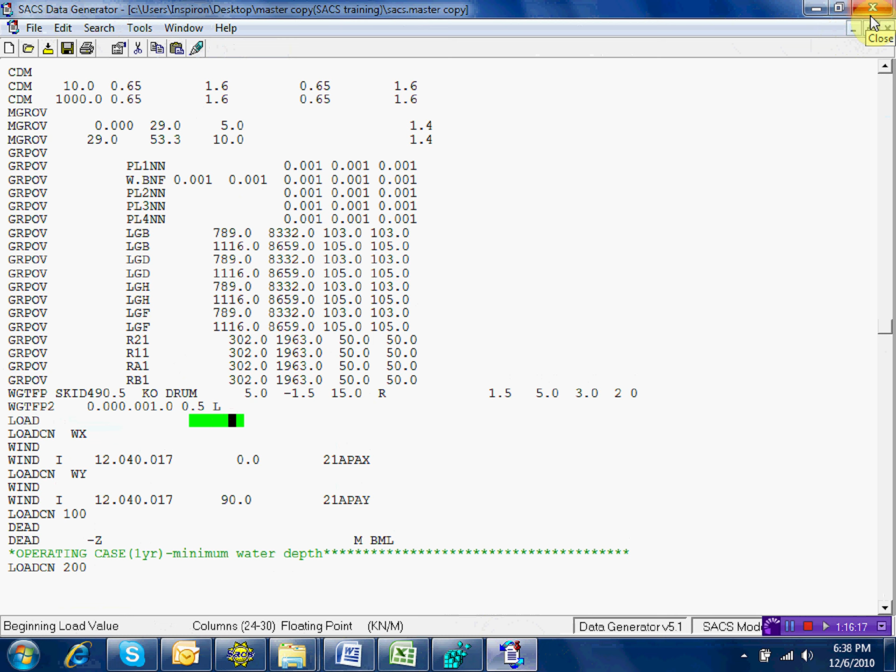Okay, now we will go to anodes. Close this. Unzoom screen, you look like that. You press this one, it will go to the original. Unzoom screen. Display, go to display, labeling. Uncheck the group.

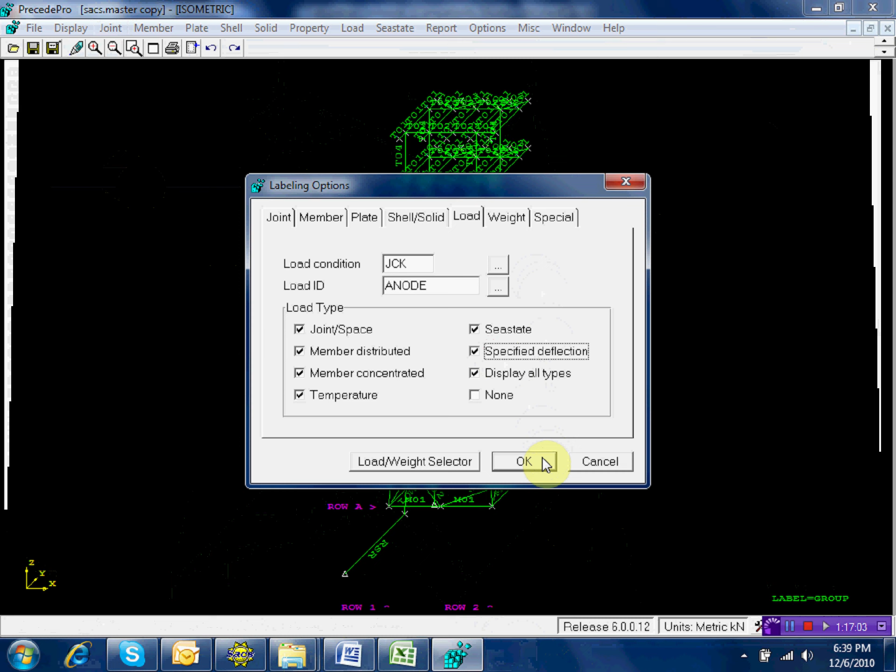And then go to load. We want to show the anodes. So jacket, JCK, miscellaneous, press OK, and then show the anode, press OK. Anodes is there. But as the wave passes, the load on the anodes are not captured.

You have to use overrides to capture wave loadings due to anodes. Because you have already the weight, no? The weight of anodes is already there. But when wave passes, the wave loads due to anodes is not captured. So the other way is to consider CDCM. So we have the calculation also.

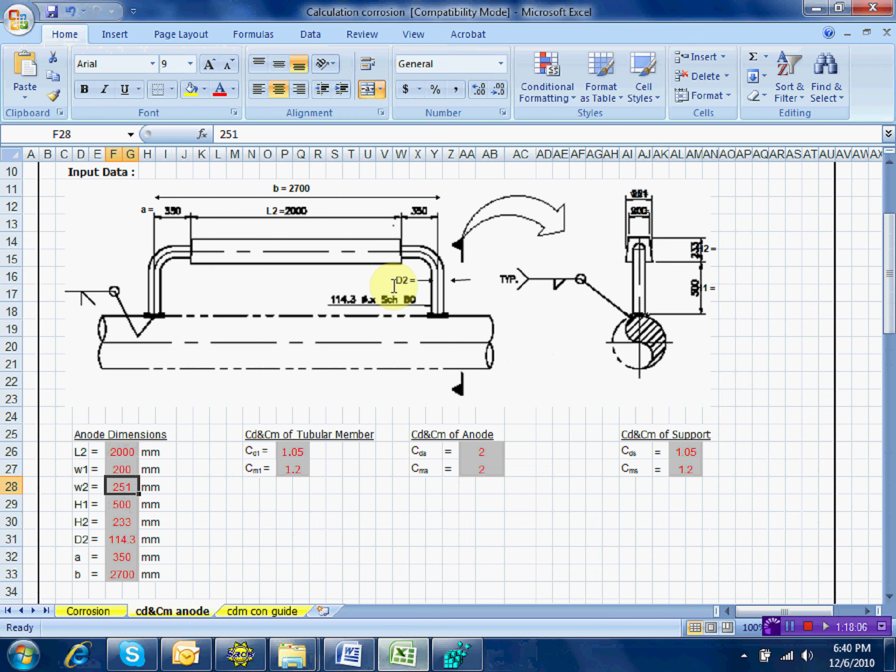Assuming this is the anodes now. This is the property of the anodes. The length is 2000 millimeters and the dimension is this. Assuming this is the anode, now this one is the input: 2000, 200, 251, all on the anodes.

All the anodes. And then for CDCM, you notice for tubular member, use this one. Basis of design, this is for tubular, 1.05, 1.2. We will use rough because it's at the bottom, right? So this is already filled with marine growth, so use the rough.

Okay? So I am using 1.05 and 1.2. Now for anodes, this is actually considered as a plate, the drag on a plate, so that's 2. CDCM, that's tubular, so 1.05 and 1.2. This is basis of design. Marine growth, all you have to do is put, okay, plus 2, and then 7, 10, and then 5.0. So this is as per design basis, right?

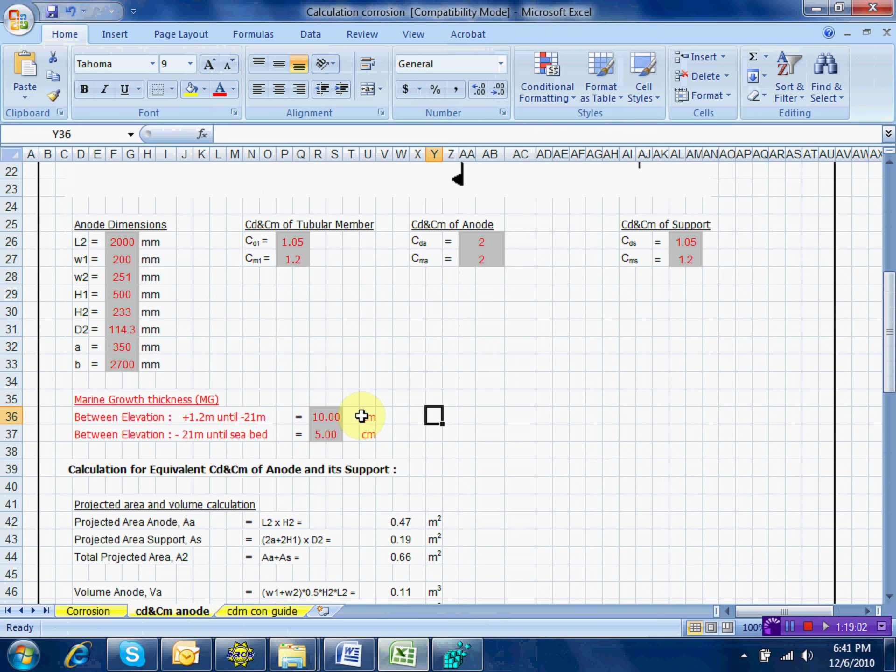This is automatic already. This is now the equivalent CDCM on the anodes only. And then you consider anodes plus the member. Okay, so I have already here the calculation. For example, I have a diagonal on the leg. Okay, so I will consider this one.

Leg is diameter for the leg. See, the diameter for the leg is 105. We will use the bigger one. 105 by 3.5, right? So 105 is 1.05. Okay, this is only an input. 1.05 and the length, what is the length?

For example, this one, this leg here, member details. The length from here to here is 29.45. Okay, I will model wave loadings due to anodes here, for this. So my length is 29.45. The marine growth is 5. Okay, so the blue one is the input, and the red one also, of course.

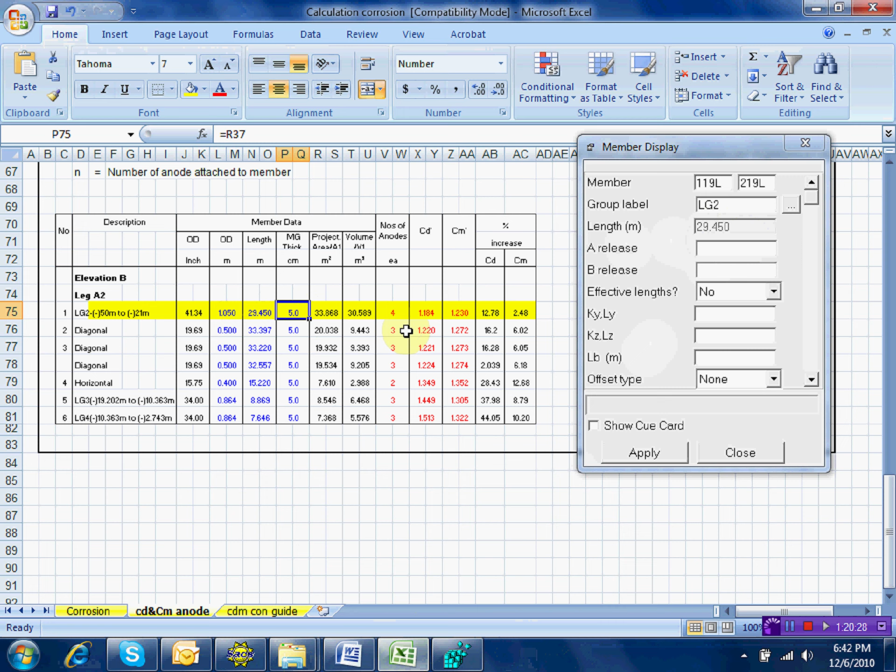And the number of anodes, how much for this member? 1, and 2, and 3, and 4. So there are 4 anodes. So you put 4. Okay, you put 4, so it should be 4. So you have already the CDCM modified, is 1.18 and 1.23. Will follow? We will use this value.

Okay, for example now, go to Seastate, go to global parameters. This is how to define member override. This is now a member, not a group. Okay, go to Seastate, go to global parameters, and go to member override. Member override, okay. After pressing member override, you select that member, this one.

Follow? This member, 119L and 219L. Press apply, and then after apply, press define. Define. Okay, we have it already here.

Take note, this is no longer dimensions, so it's actually coefficient. You follow? The first is dimension, the second is coefficient, the CDCM coefficient: normal drag in Y, normal drag in Z, normal mass in Y, normal mass in Z. You are going to consider only drag.

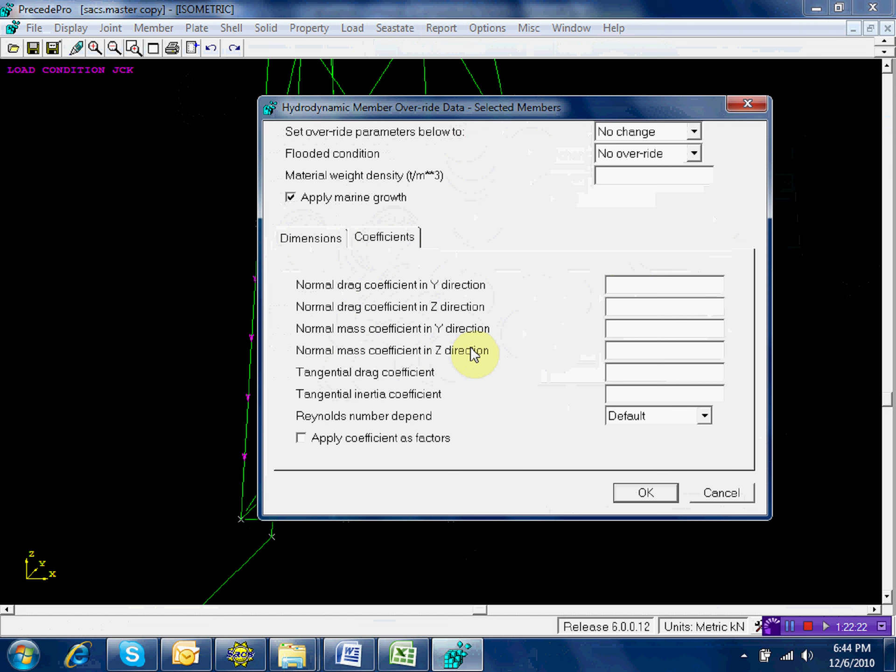Normal drag, so I will apply normal drag on Y, how much? Based on our calculation, the drag is 1.184. So I will put 1.184 for Y, and on Z the same, 1.184. Normal mass also 1.23, 1.23, 1.23, 1.23. That's it. No need to consider tangential.

Select adjoint, this one. Define. Close, save first. Seastate, global parameters.

Member override, select this. They have the same, right? The same length. Apply, define, and then coefficient, the coefficient 1.184 and 1.23.

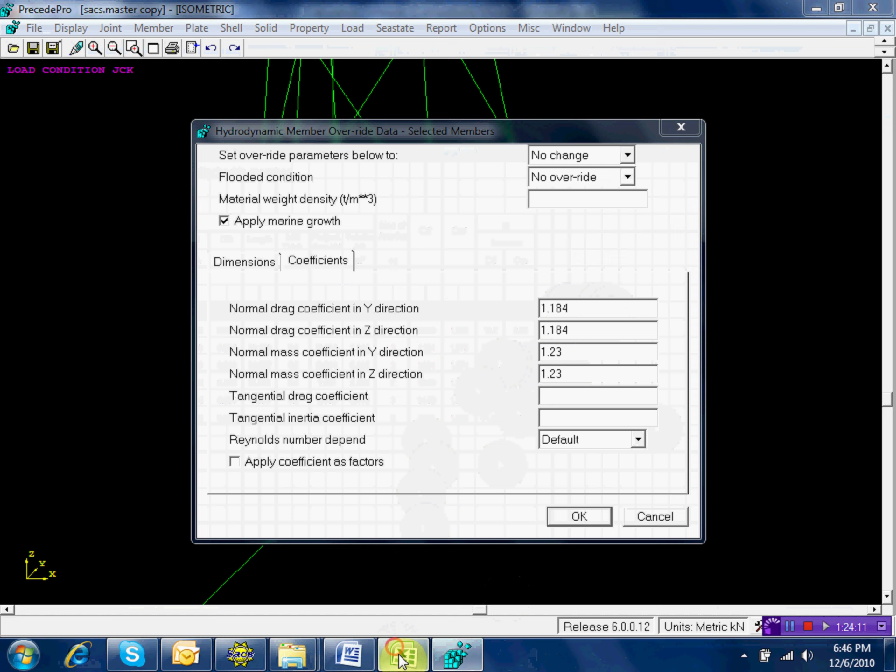1.184, 1.184, 1.23, 1.23, 1.184, 1.23. Press OK. Save. How about on this side?

The length is the same, assuming the same length, so a small one, 29 point small. So Seastate, global parameters, go to member override, and select.

Multiple selection now, you can select 2, and then check coefficient: 1.184. You can press control and then select. And then the other side is 1.23. Press OK.

Okay, the same also here, diagonal, so you have to go one by one. Diagonal, diameter is 0.5, the length is 33.397. Which one is this? 33, this one, this side.

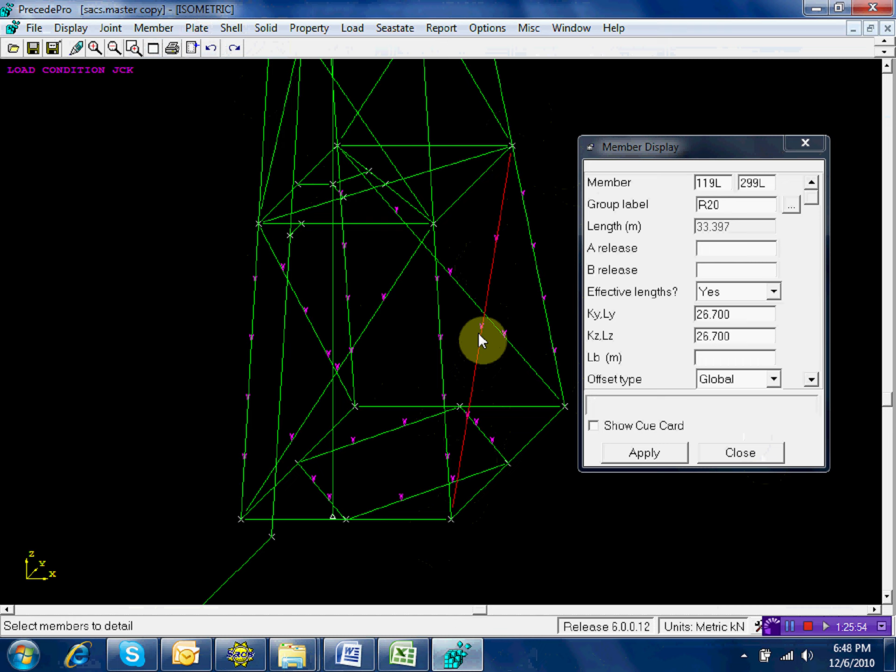You have how many anodes? 3 anodes, so this one is the value. Diagonal: 1.22 and 1.272.

Seastate, global parameters, member overrides. Assuming they are the same, this one on this side also, this and this and this. You have to calculate, the procedure is still the same. Apply, define, 1.22 and 1.272, 1.221, 1.2. This one is 1.22.

Oh, this one is quite bigger, 1.2, we will use this one. This is bigger, 1.224 and 1.274. 1.224, 1.274. 1.224, 1.274. I pick the highest, and select this diagonal to make it faster.

The principle is like that, okay? So I select all diagonals and I choose only the biggest, which is this one. I will still have this. Well, anyway, it's 0.4. Press OK.

Close, save. On the bottom also we have 2, this one, so we have already calculated this. This one is 2 only, so you have 1349 and 1352. So go to Seastate, global parameters, member, override, and select this.

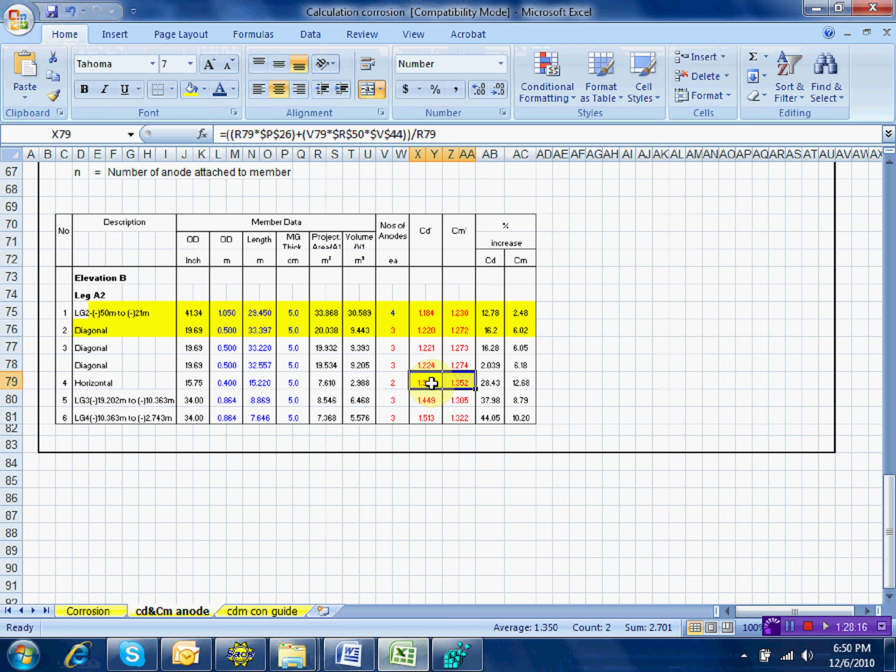Press control, select this, select this, select this. Apply, define, and the drag will be 1.349 and 1.352. 1.349, 1.352. Okay?

Mass drag. What else? What are those appurtenances which are not modeled on the jacket? The conductor guide. The conductor guide is big. If you have 36 inch, it should be around 40 inch diameter. And it's not modeled here, right? Is it modeled? It's not.

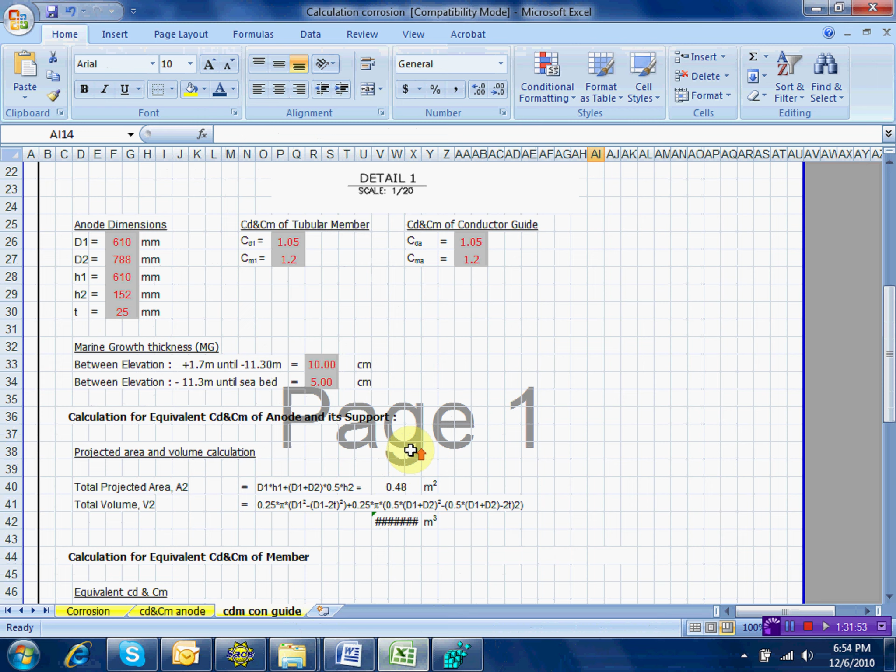See, I have here the input, so there is. Okay, how about if we don't have this one? We don't have that CDCM. So you have no choice, you have to model the conductor guide because it can be modeled by the SACS, right? You can make it a cone and then a cylindrical section.

Okay, I will teach you how to model a conductor guide to capture wave loading using the wishbone element, because the wishbone element is automatically generated by the program, right? In our analysis, here, we will not use it.

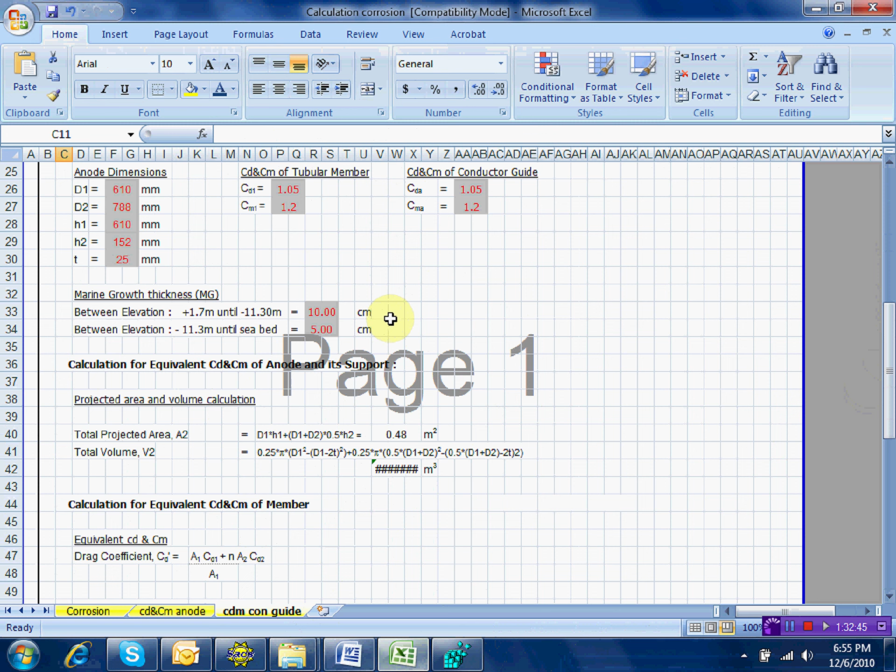Okay, so instead of computing the CDCM due to cone guide, we will not do that. I will use the wishbone element. We have only guides.

Okay, so the first step, since you release this one, right, it will not carry vertical load because these members should only be a guide. It will only carry lateral loads, from conductors to jacket. See, if you go to display, labeling, if you go to member and AB release, now display member AB release. Oh, it's not release. It's not release, it's not release. In your model, is it release or not?

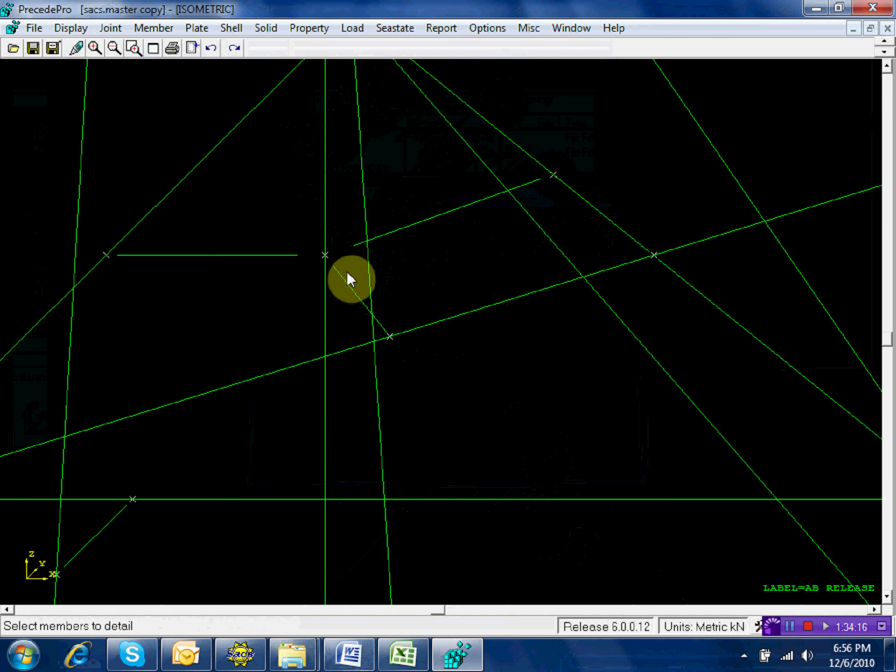If you consider CDCM, you should release like this, because the principle behind these guides is that they are only guides. They won't carry vertical load. So if you release this one, you do release like this.

This is the proper way to release CG guides. Select this, see this is joint 7005. So for a while first, go to display, labeling, and then check the name so that you will know which joint is this. This is 7005, and this is 006.

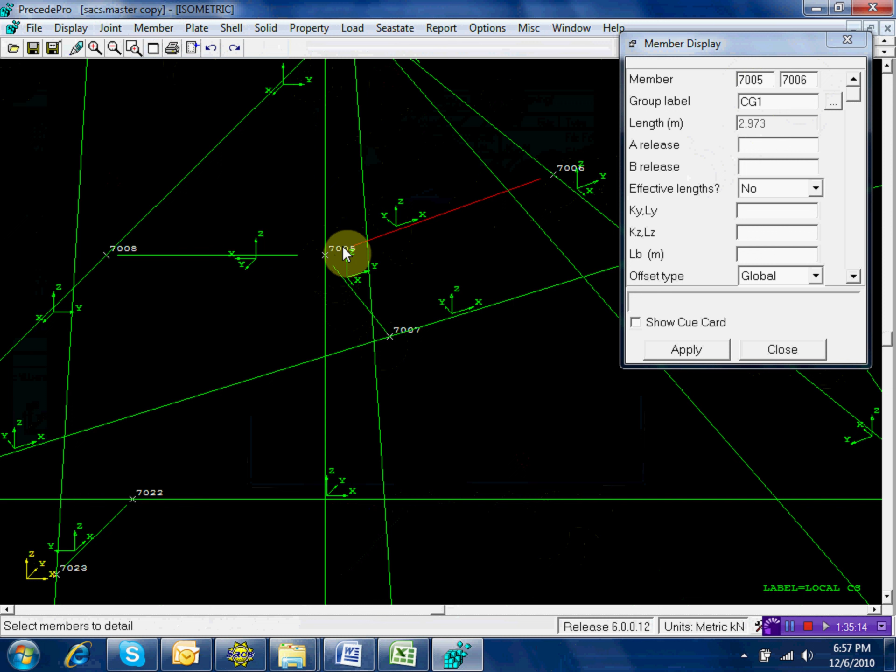001111, for member it is release. You have fixed on X, it will carry lateral loads. So lateral loads is X and Y, right? Vertical is Z, so you should release 1111.

That's the proper way, but the problem with this method is when the wave passes through the structure, the cone guide is not there. It's not there, so the wave loading on the conductor guide is not captured. Take note, it's a big one. So what I will do is model the wave, the cone guides.

So if you model the cone guides, do not release this one, otherwise you got problem on instability. So one method is to model the CG guides. I will model the CG guides considering a wishbone element. A wishbone element is just the same as a guide, where it will only capture the lateral loads.

So to add a wishbone, you need two coincident joints. This is the first step, add a joint same as this, because you add a wishbone. 7005, you add a joint. So I will go to joint.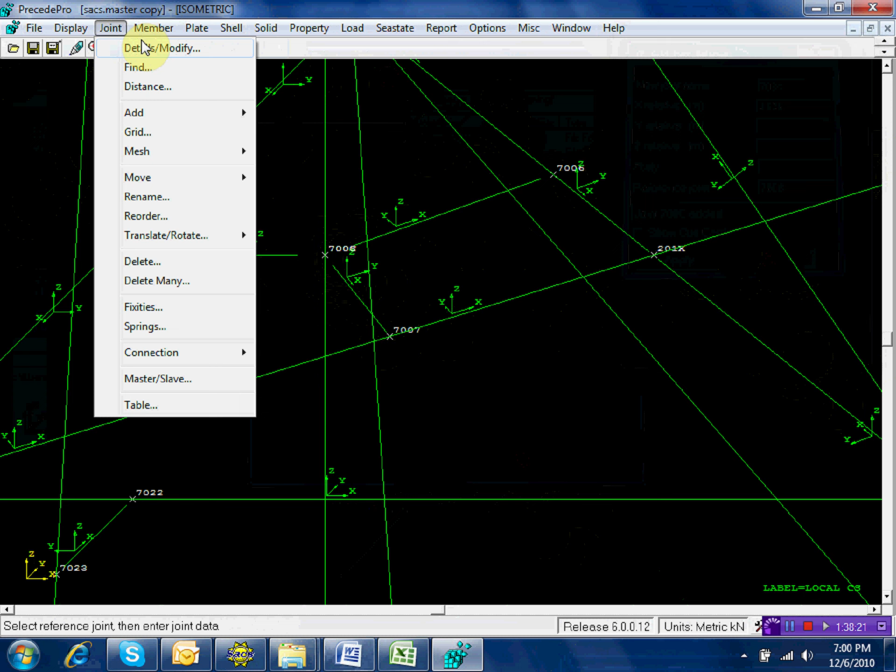Apply. So you notice, if you go to joint and then details, you have two coincident joints. The first is 7705, the second one is 700C. That's the first step to add wishbone - you add one joint same as this.

Then I will model now this one: 0.5 down, 0.5 up, and then a cone. Joint, add, press relative, I will add a joint here. Select this joint, and then Z - what is distance? 0.5 meter, from the figure, 0.5.

0.5 up, sorry. You have to consider joint. I will rename this to 703C, meaning to say cone. Rename and then 700C. Apply - up, it already exists, so I will increase this to 705.

Joint, rename, in here, 700, 703C. So this is 703C.

And then joint also, I will add relative. No, relative - select this joint, and then I will add a joint downward, and then this is 705C, meaning a cone, and then minus 0.5. So see, 0.5 up, 0.5 down.

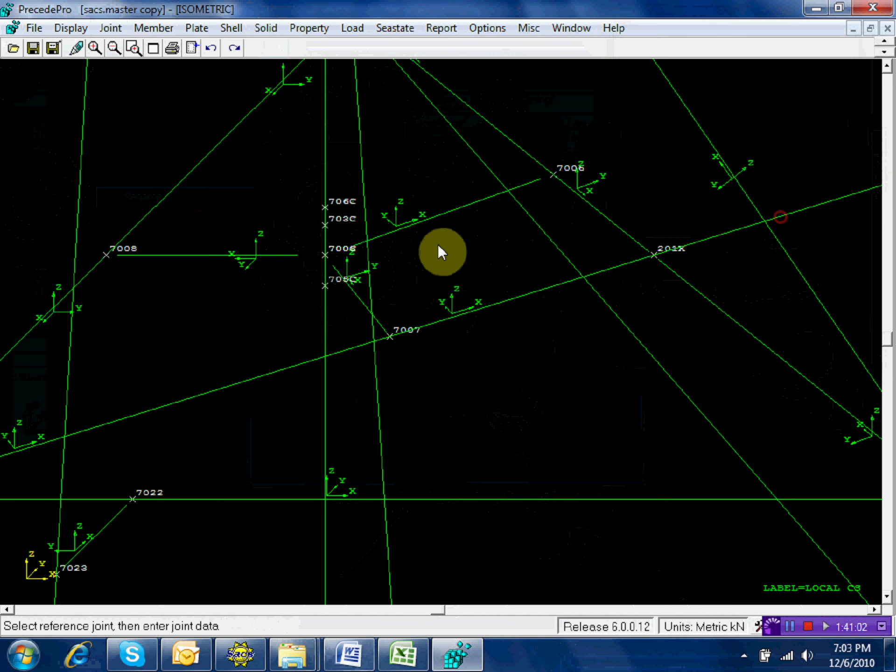I will add a member now, but be careful, it should be connected to the cone - meaning the joint should be C. Member, add, select this, be sure that's in C. And this one, oh, it's not C.

But you can double click. Okay, it's already C, right? Meaning to say this, that's a cone - cone guide, CNG. Apply.

Okay, I will apply now - a member, add, be careful, it should be in C. Okay, it's C, right? This one you have to double click because you have two joints here, it should be in C. And then at the top, 703, cone guide, CNG. Apply.

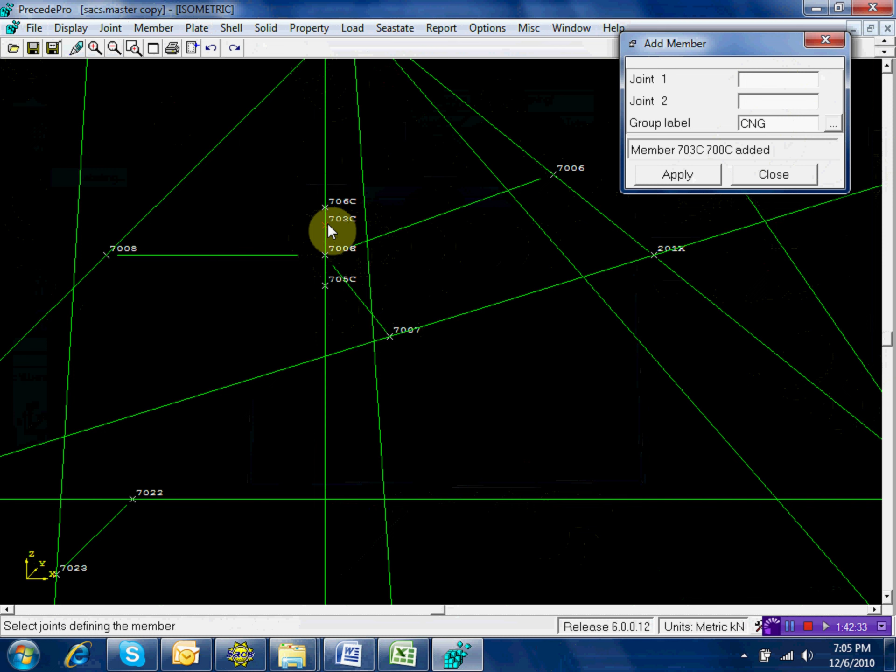From here to here, we will call this cone 1, CN1, because this is a cone now. From here to here is cone. Apply. Save the model.

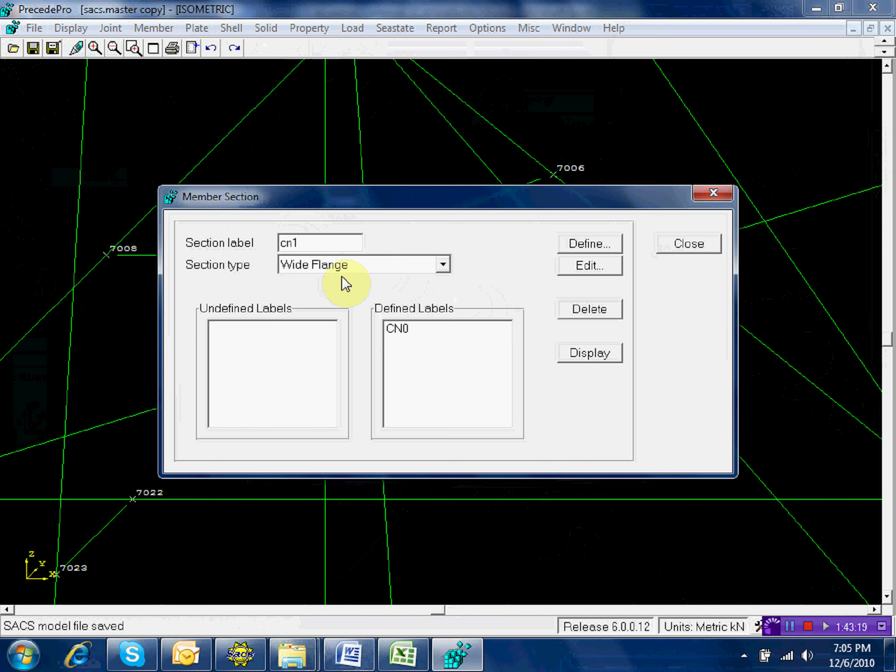We will now go to property and model first the cone. In cone, you need to go to section, property, member section. So you have the member section CN1. Select cone. Define the cone. Larger diameter.

161.6. Wall thickness of 2.54. Smaller diameter of 101.6. Is that correct? Thickness is 2.54. Okay, so we have already modeled the cone.

Press OK, close, save. We will go to property, member group. So you have CNG, the cone guide. Define, tubular. That's the bottom one, 101.6, and wall thickness of 2.54. Yield stress is 34.5.

Now, you remember we apply a cone guide load, right? We apply already, so when you model it, it will be duplicated. So your density should be set to 0.001, otherwise you got a problem. Duplicated already. Press OK.

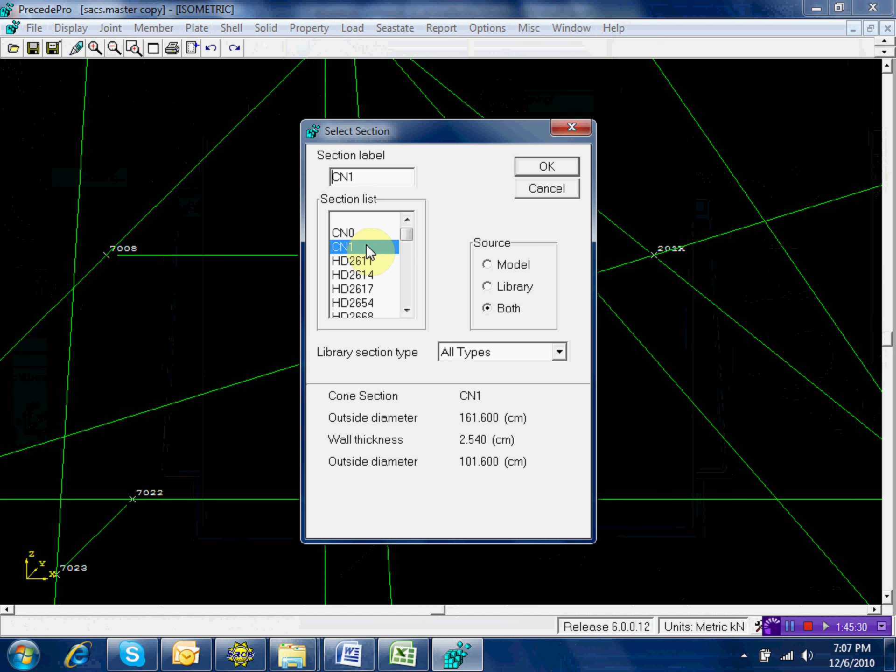The cone guide, select cone guide, define. It's not a tubular, so you go to general. Scroll. This is now CN1, right? Is it CN1? Okay, this is correct. Press OK now.

Display to line. Oh, it's inverted. You can reverse. Model viewer. It's really inverted.

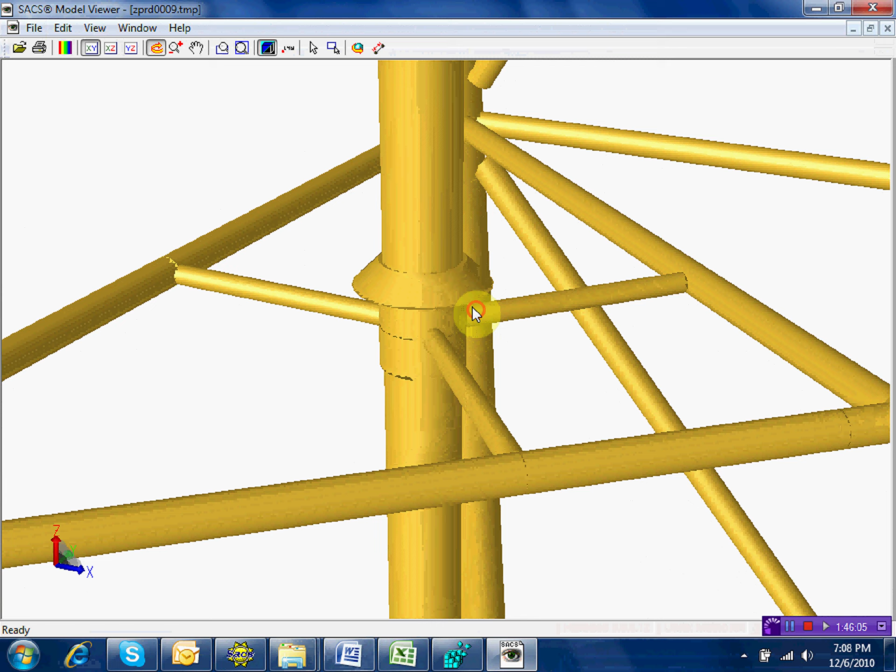So you can do member details. Oops, you have to unhide the cone. This is cone, CN. So go to display, select, and exclude CN. Just put CN. It's already like that. Go to member, and then reverse the joint. Reverse. Apply. So display, model viewer now.

Okay, you have now the cone guide. Look like this.

So when you model this one, and the wave passes, it's already captured, so no need to consider CDCM. But anodes will not be modeled, so you use CDCM.

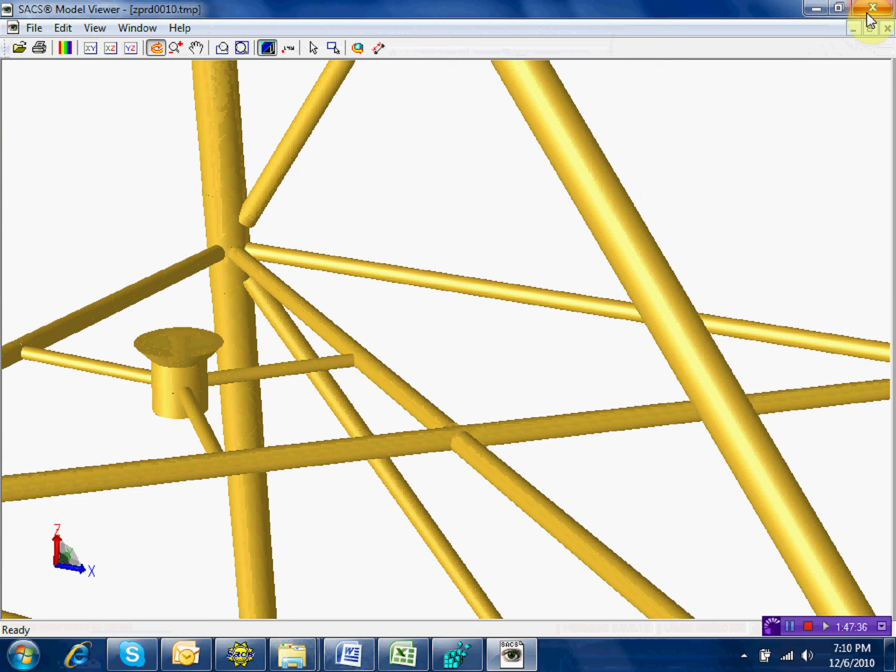This is not done yet, we will change this one. You notice the original, now this member, see? That 7005, 7006 is not connected to the cone, right? Because 7005 is actually on the conductor. What you will do is connect this member to the cone, not to the conductor. And the connection from conductor to the cone guide will be wishbone.

So change this one to what? 700C, right? The cone guide is 700C. This is the same with this. Apply. Change this member from 707 to 700C. Apply. This one also.

So the principle: this member should be connected to the cone. The cone is 700C, right? So this one, see, 700C, 705C, 700C, 700C, 700C, 700C. Okay, 700C. What else?

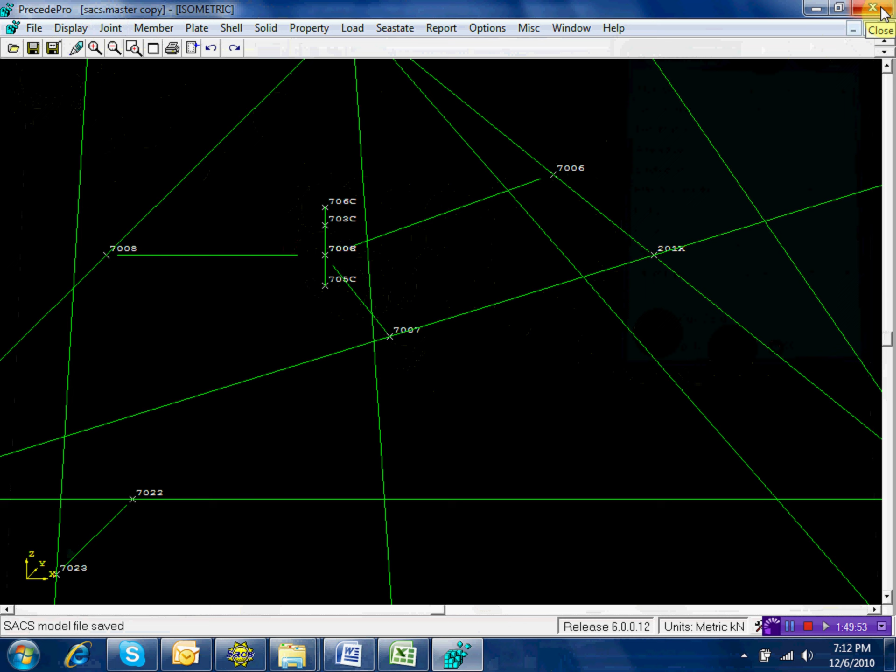Save the model. We will go to jacket GCK loading, the cone guide. Go to data file and search CONEGD. Anode is there. Mudmat. We have the cone guide. See, this is 7005. It should be 700C. Huh? 700C. The 7005 will be changed to 700C.

700C, 700C, 700C. Well, anyway, you will notice when you run the analysis, you got an error on this if you don't change the 7005 to C. Okay? Go to model.

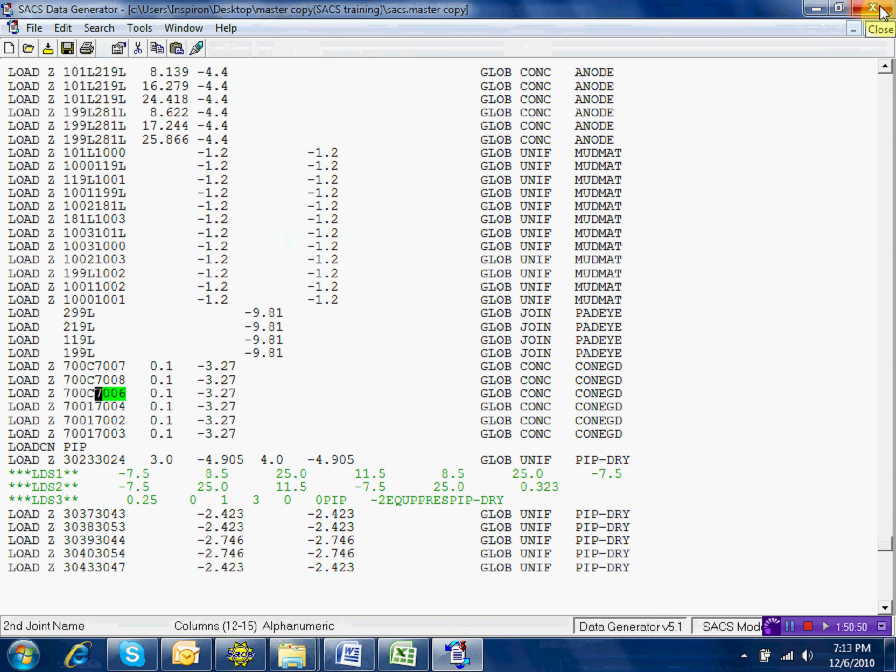We will introduce now what we call a wishbone element. We will add a wishbone element. Go to member. You notice this is a wishbone, see? Member, wishbone joint. You select this 7005 and you select again 700C. Same joint, because you have two joints, right? Select wishbone joint 7005 and coincident joint 700C. Okay, I will go back.

Member, wishbone, select this again. You have two joints here. First reference joint at the bottom, second reference joint at the top. Top, bottom. Press apply.

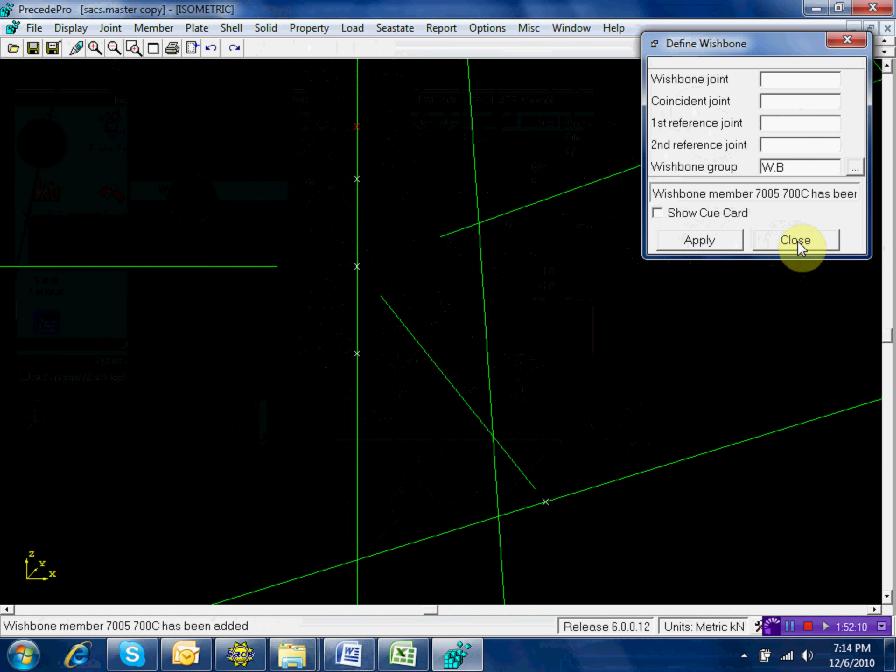Okay, then save. Try to notice when you go to display, labeling, and you go to member, AB release, it's automatically released. This is along X, so no load or release about this. So about Z, right? Yeah? And then X, Y, so the same.

Display to line. So you have now already the wishbone element, this one. Same as what we did in the upper segment. Also, you define this one and then perform analysis. You can run the analysis now. Can you run the analysis?

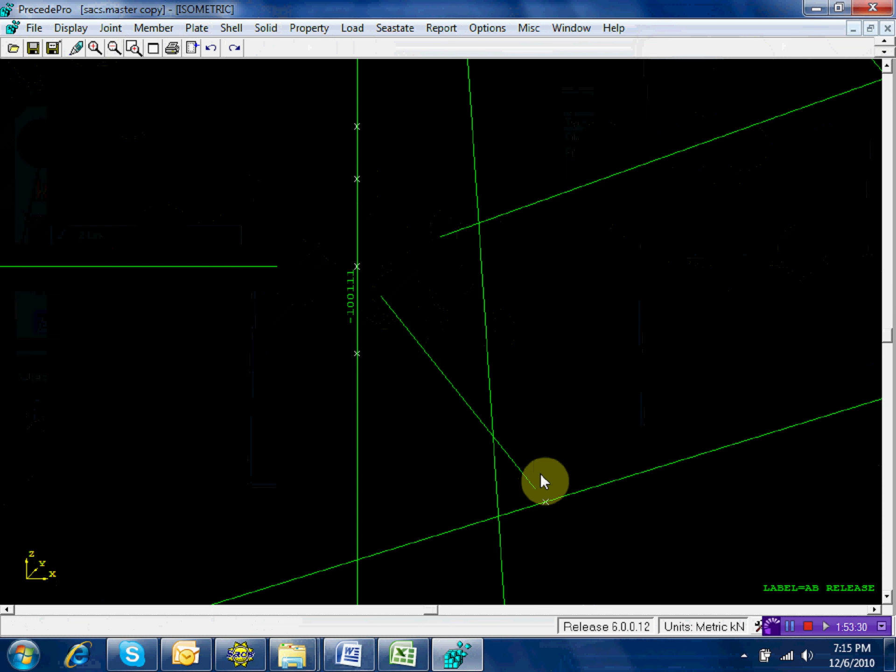So this is now, okay, it's already released. Same as you release this, and that.

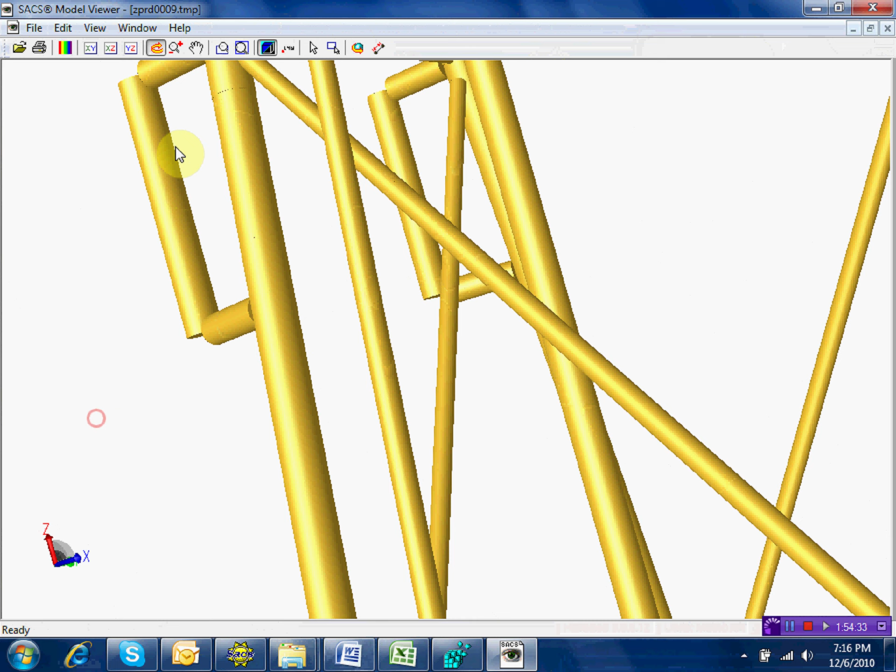So the upper section, you have to model also, here. You have to model the cones. So tomorrow, we will simulate dummy members. Dummy members are members which do not contribute stiffness on the structure, but will generate wave loading. Like, for example, boat landing. Boat landing does not contribute stiffness. So like this one, this is our boat landing or barge bumper. This will contribute wave loading but does not contribute stiffness.